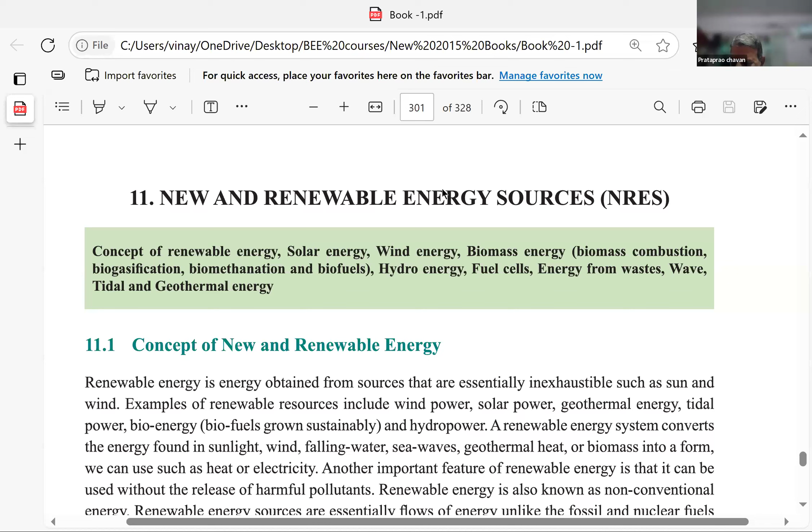Okay, I think we should begin because this particular chapter is the longest one. It contains 28 pages. The purpose of this chapter, New and Renewable Energy Sources, is to clear your concepts about the energy sources, their technology in brief, and with respect to their efficiency levels or the reasons why the efficiencies are less or more, what are the constraints. That's a general type of chapter.

On this chapter, you will hardly find any big question, not 10 or 20 mark questions. If you go to the previous exam papers, test papers or solved papers, you will find about 3 to 4 marks multiple choice questions based on this chapter. So you have to be very particular when you read this. You don't expect big examples or problems to be solved, not even for 5 marks, but there will be short notes related to a particular energy source and its efficiency. The short notes will be having approximately 5 marks. In addition, in the first section of MCQ, out of 50 MCQs, you may find 3 to 4 MCQs based on the materials in this chapter number 11.

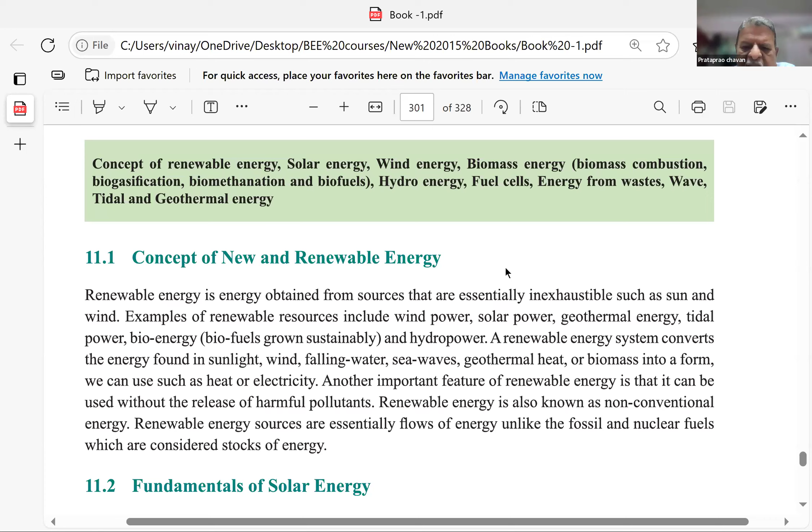So let us start. Since it is basically a conceptual clearance chapter, we will discuss the concepts. Whatever is readable, you can read through and understand; I will not spend much time on that. I will be more interested in explaining the things which are not very clear when you read these pages, right?

So, fundamentals of solar energy. What is solar energy? You all more or less know. The purpose of exploiting this particular energy source is basically to avoid carbon use or hydrocarbon burning while generating heat. The heat energy we get from the solar rays is environment friendly, meaning it doesn't pollute the environment any further.

But solar energy has got one drawback: it is very widespread. The quantity of solar light or energy falling on the Earth's surface is spread over a very large area, and this spread-over energy intensity is so low that as it is, it cannot be used. You will have to collect it, concentrate it somewhere, and then raise the temperature of the medium you want to heat.

Again, solar spectrum is of different wavelengths of light - ultraviolet, higher wavelengths, lower wavelengths - carrying different types of heat components. So when you are designing a solar cell, you are not able to collect all this solar energy in different wavelengths into that solar cell. Therefore, the efficiency of a solar cell converting sunlight into another form of energy, whether heat energy, light energy, or photovoltaic energy, is limited. Remember, solar cell efficiencies range from 10 to 15% or 15 to 18%. Even in the most highly efficient cell, it will not exceed 20%.

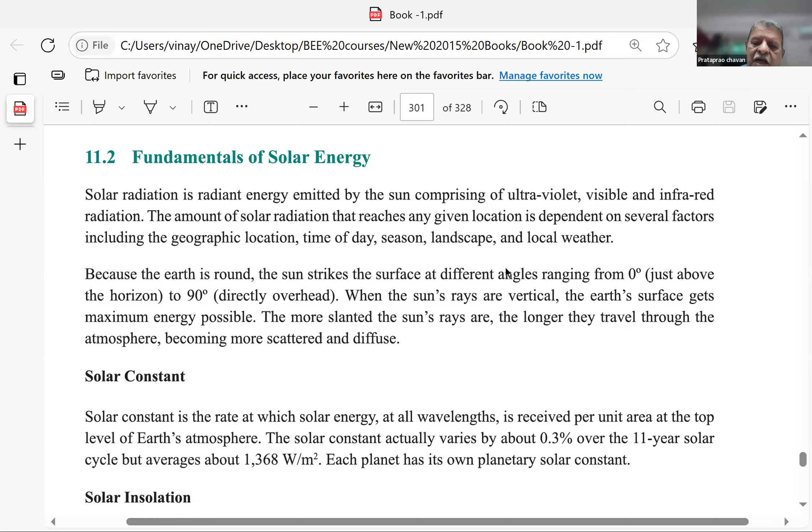One is solar constant. What is solar constant? When the sun is in the sky, it gives light not only to Earth but to all the planets in the solar system. We've learned there are 9 or 10 planets, whatever, it's immaterial. So the solar light reaching each planet, including Earth, varies in intensity depending on the distance of that planet from the sun.

Our planet receives a certain intensity of solar light, about 1368 watts per square meter. This is constant for the entire earth wherever sunlight falls, but where does it fall? At the outer limit of our atmosphere. That means where the atmosphere exists above the earth, at that end it is 1368.

But when it actually reaches the ground, it has to pass through cloud cover and the gaseous surroundings in the atmosphere, stratosphere, at different kilometer heights. These covers surround the earth, so the sun's light penetrates through these gaseous and air covers onto the surface of the planet.

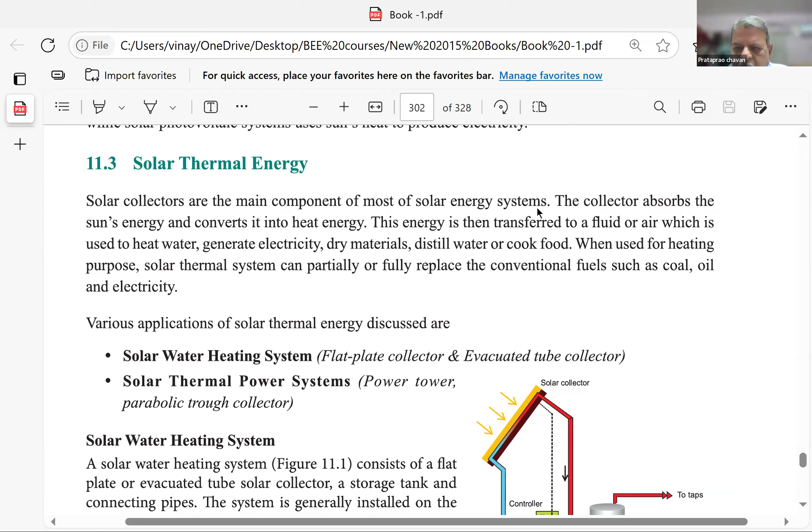It goes through the center tube, comes back all around the same tube. Now in this travel from this end to the outlet end, this middle tube is covered with a heat absorbing metal, or a layer, heat absorbing paint or some synthetic layer. This layer absorbs whatever sunlight is coming, and the outer tube is a vacuum tube.

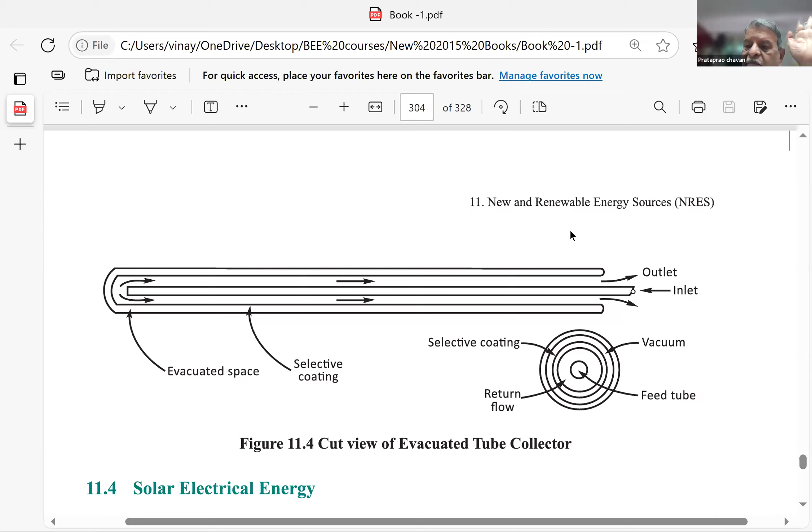It transfers by radiation. So the outside ray, sun's heat, will go to the inner tube. Because of the absorbent layer, it gets absorbed and imparts the heat to the inner water, but it cannot come back. Whatever radiation small amount comes back, the loss will be very minimum. So the efficiency of this type of evacuated tube heat collector is much more. You can reach outlet temperatures of 150 degrees centigrade, more than twice what the flat plate collector gives.

No, this is a flat plate collector, this one. So the efficiency of this is less. It can raise the temperature 50 to 60 degrees, whereas this type of tube arrangement gives you 150 degrees.

Now, this difference of 50 degrees, 60 degrees or 150 will be prominent when you go to industry. In an industry where hot bath of water is required for many reasons, sometimes it is quenching, sometimes it is annealing function. They have to dip their hot parts into the cold water at a certain temperature, and they have to maintain the temperature of that hot bath water to certain degrees. They are using gas burners or other type of heat and spending money on that, creating CO2.

As an energy auditor, I will suggest you put this type of heat collectors on the roof of the factory and reach a water level of 150 degrees centigrade temperature. Their bath temperature requirement is hardly 120, so 150 is a good temperature for them. They can totally eliminate the use of gas burners or other diesel fire systems and all that. They can remove that system and go for a changeover.

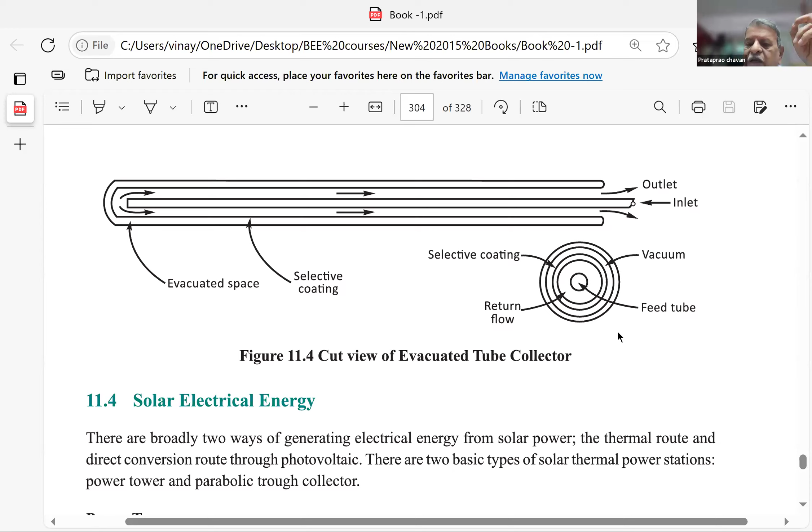From this point of view, an energy auditor should know which are the clean systems that can serve the purpose of the industry, different thing.

Now, another way of collecting solar heat on a much more concentrated level. That means reaching temperatures of say 500, 600 degrees centigrade, which is not possible by evacuated tubes or flat tubes. Remember in childhood you used to burn a paper by putting a glass and collecting the solar light into a point. The point is falling on the paper and the paper starts burning. That is nothing but concentrating the solar radiation heat at one particular point to increase the temperatures.

Same thing is used here when a solar power plant is based on heat, it is called solar thermal power plant. Thermal heat, anything related with heat is thermal. Okay, so here is the sun god here.

The sun rays are falling on mirrors, reflectors they are called. The reflector is of concave shape and its center is somewhere at a distance. This can be adjusted always, we learned that in physics experiments. So this concentrating instrument has a center at the top of a tower, and this tower is coated with absorbent materials here.

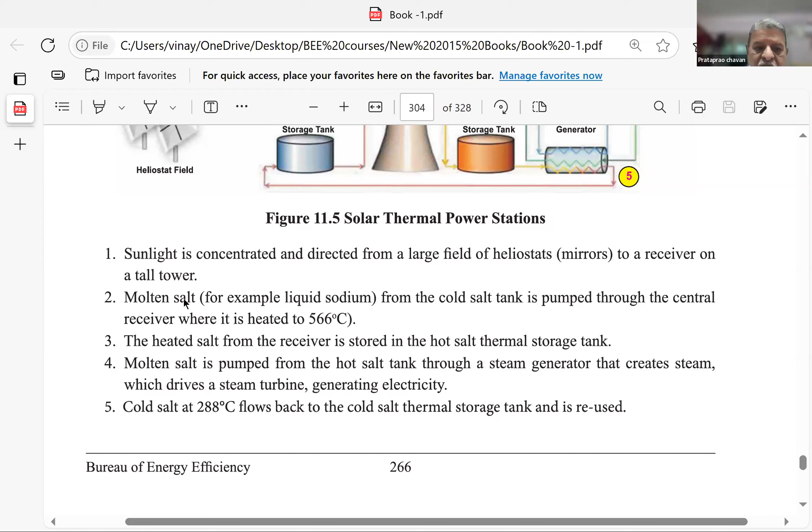Okay, all the details are given here. See, sunlight is concentrated, directed from a large field of heliostats, that is mirrors, to a receiver on a tall tower. Molten salt, heated salt, molten salt, and this thing - conceptually it is better. Molten salt is a mixture of 60% sodium nitrate and 40% potassium nitrate.

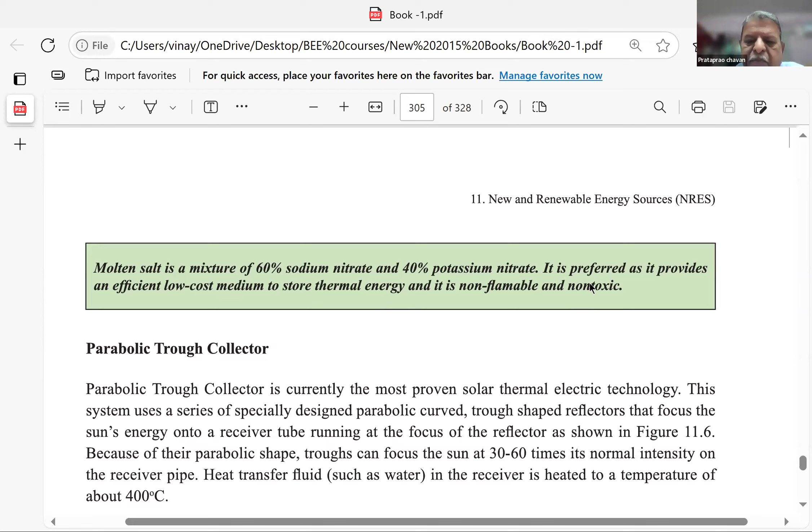It is not the sodium chloride which we eat as salt, that has a different composition. It is preferred as it provides an efficient low cost medium to store thermal energy, and it is non-flammable and non-toxic. It's a safe medium, that is why it is used. So many times in MCQs they may ask why salt is used as a medium.

Then there is another method of concentrating the solar heat. What is that? It is much simpler than the salt, it doesn't involve any salt. What they do, you see the reflectors here - it's a parabolic reflector. Means what?

Suppose, I will just clear your concept. If you have a plastic water pipe, 4-inch size, 8-inch size, or a very large plastic pipe having a size of say 4 feet diameter, 5 feet diameter, if you cut it exactly in half, you will find two troughs, two halves generated. If it is a long pipe, a parabolic structure is generated.

Now this parabolic structure has somewhere a center point, Kendra Bindu. Now that center point is receiving all the reflected sunlight concentrated into that point. So if the trough is parabolic and running lengthwise, the same center will also be running. That means everywhere in this red line, there will be intense heat concentrated from these parabolic surfaces.

Now, if I put a water pipeline exactly in the center, the water in the pipeline will continuously receive the highest heat temperatures from these parabolic reflectors, as it was given to the water tank on the tower. So instead of raising a tower, what I will do is lay a length of kilometers of these parabolic structures in straight lines all over the field, 10 acres, 15 acres of land, and run this pipeline through the center, collect all such concentrated water, which is very hot. And the magic is, at this end, the water will enter these tubes as water which is at ambient temperature.

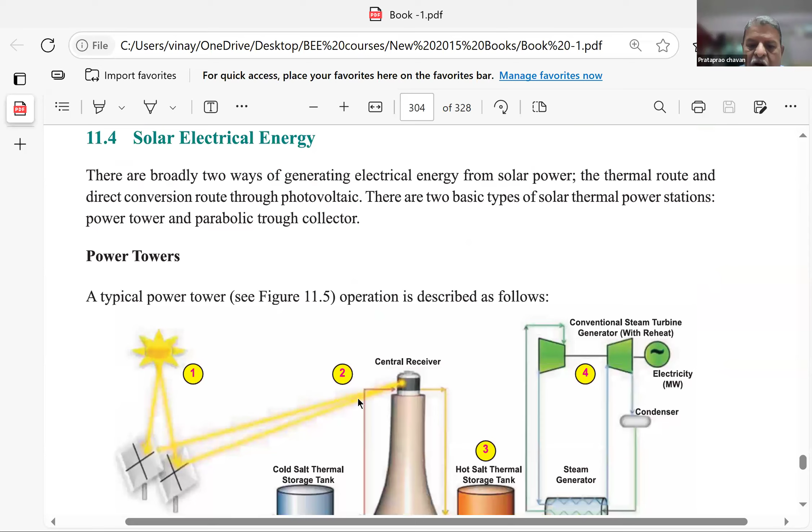So when you want to generate power, you need a higher scale on which you have to collect the solar heat. The higher scale collection is easier with this trough technology, parabolic trough collectors. Wherever there are solar thermal plants, they prefer this method rather than using salt and creating a tower with so many mirrors operating on that. There are some pilot plants already operating on that system also, but this is a popular system and many thermal plants use this.

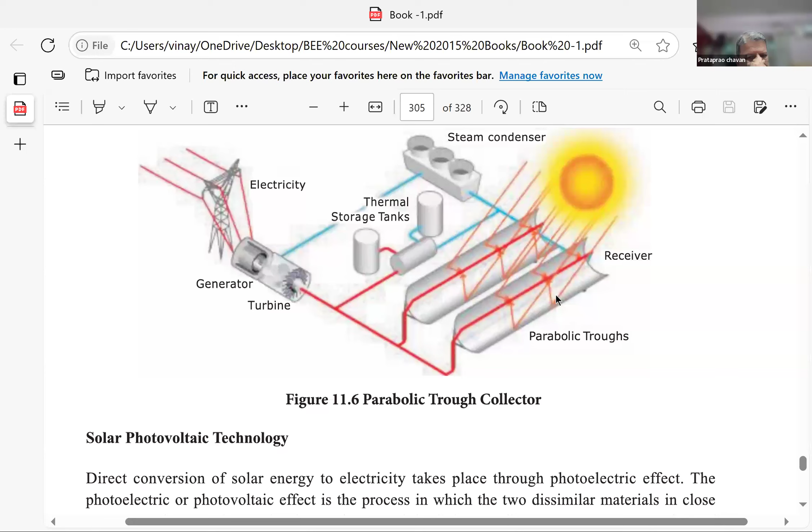Then comes the light component in solar. One type of energy we have already discussed. The second type of energy needs no water, no steam, no medium in between. You design a silicon material cell in such a way that the solar incidence, or solar heat, or light falling on it, due to the spectrum length of that particular light, causes the solar silicon material in the cell to get disintegrated into positive and negative electrons.

And we know that if there is a positive and negative electron, it will develop an electronic circuit between plus and minus. That means you have a potential difference between two points. This potential difference, if you put it through a resistance, you will get light or you will get power.

If you put a number of such cells together, for example, one cell gives you only 0.5 watt. If there are 100, you will get 50 W, or so, that you can work out with units. So if you put a number of cells into a rectangular panel, it is called a solar panel. The individual part in that solar panel is a solar cell. So a number of solar cells connected in series will increase the voltage, and the more solar panels you use, the more land covered by it, giving you power in megawatts.

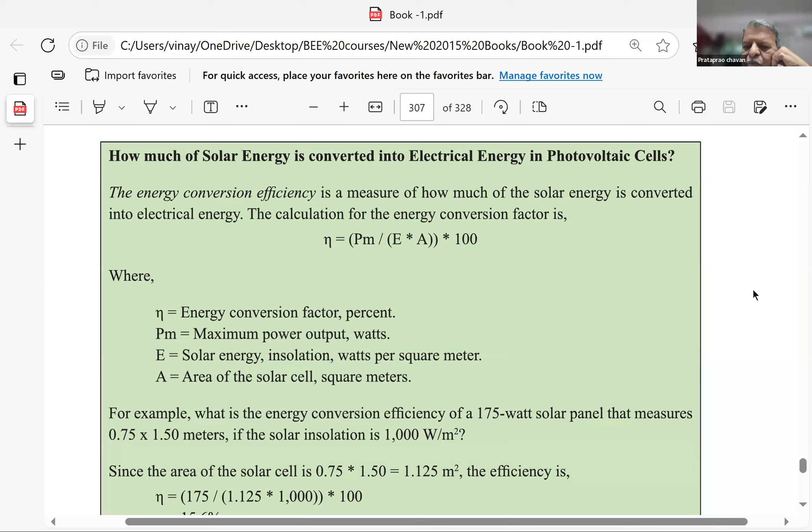Now, he has given you a calculation of how much solar energy is converted into electrical energy in a photovoltaic cell. Go through the example, it's very simple. The answer is interesting: efficiency for this cell is 15.6%, much below 20%. 20% is for new advanced technology cells, but otherwise conventional cells are 10 to 15%.

Now, building integrated structures - these are all innovations. What is building integrated? If the solar cells or solar panels are designed with a very hard glass surface, you can create a roof out of the panels only. There's no need for a separate roof, so the cost of the roof of the building can be saved. The roof itself becomes the power generating solar cell roof. That is building integrated structures.

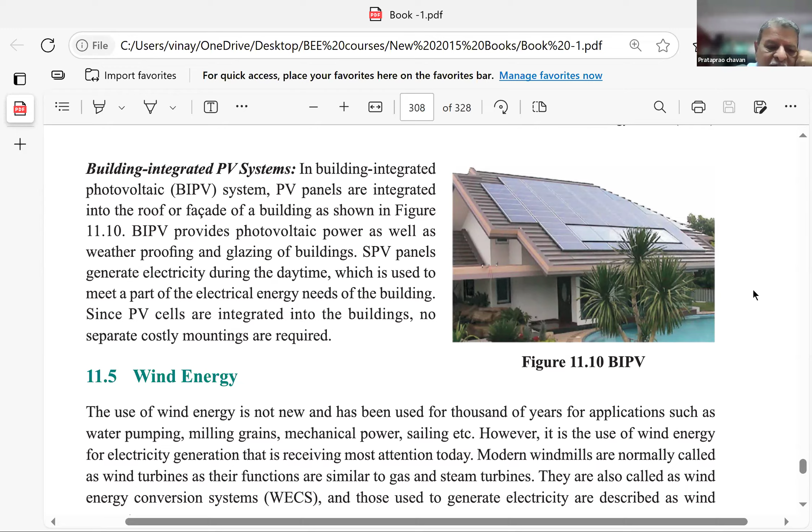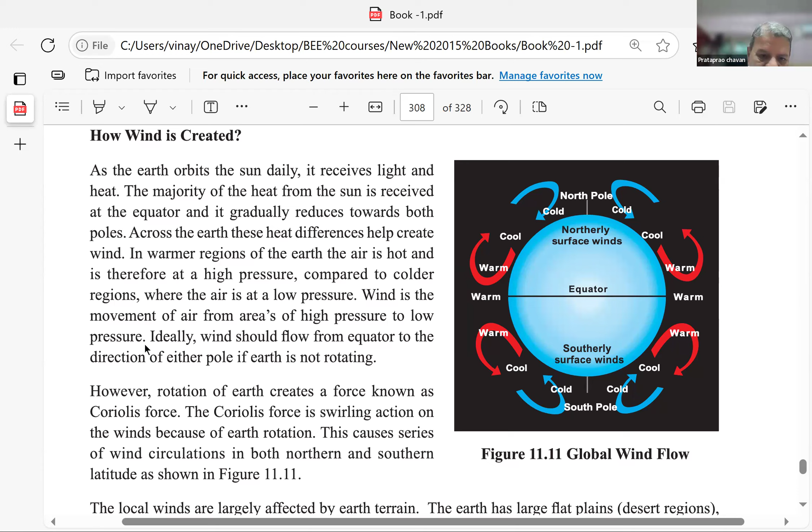And then we say northern winds, southern winds. When we say the rain comes from the south, isn't it - the cloud is carried by the wind. So this is how wind is created. This is the description I have told you. You can read through: the earth's rotation creates wind.

This is known by different scientific names. Rotation of the earth creates a force known as the Coriolis force. This Coriolis force causes a swirling action on the winds because of earth's rotation. This causes a series of wind circulations in both northern and southern latitudes as shown here. So if there's an MCQ asking how wind is generated - because of the earth's rotation, right?

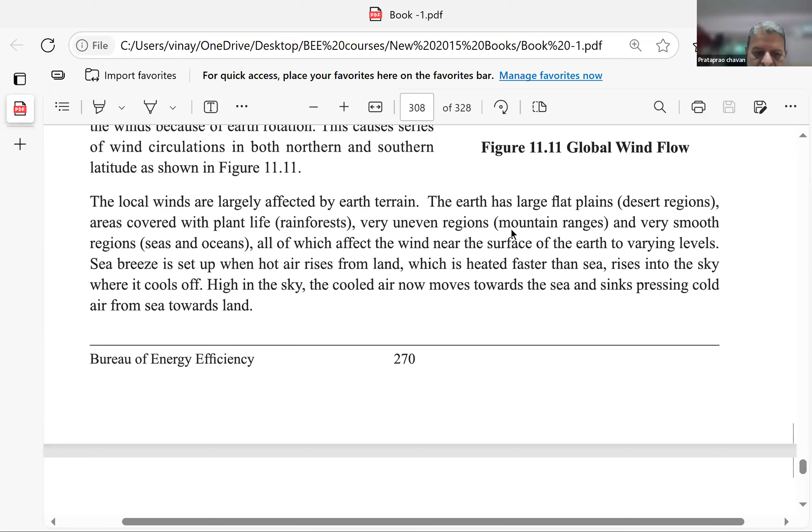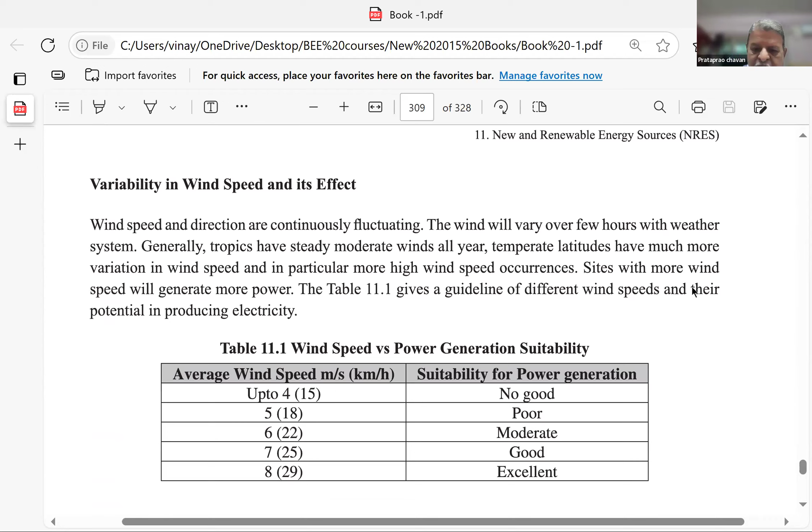Okay, now let us see the further effects of that - variability in wind speed and its effect. Wind speed is not uniform at all locations. Even at the same location it is varying - sometimes high velocity, sometimes poor velocity. There are numerous atmospheric factors for that. If we take an air velocity survey at different locations, you will find that air speeds are different.

But what we have selected is wind speed versus power generation suitability. Even a small wind velocity will rotate a small turbine, but it's not commercially collectible, so we leave that - we cut it off, like we say for solar. Is there no sunlight in the morning? Yes there is, but it's so low intensity it won't generate power. So we select a solar window, say morning 9 to afternoon 3. Likewise, for different wind speeds we have selected a window like this.

4 meters per second converted into kilometer range is about 15 kilometers per hour. If this is the velocity, it's no good for power generation - we will not collect this. As you increase the wind velocity, naturally you start generating power. At 18 it may be the cut-in speed, poor. At 22, moderate velocity. At 25, good velocity. And at 29, excellent velocity at which your windmill will run faster and generate more power. How does it generate?

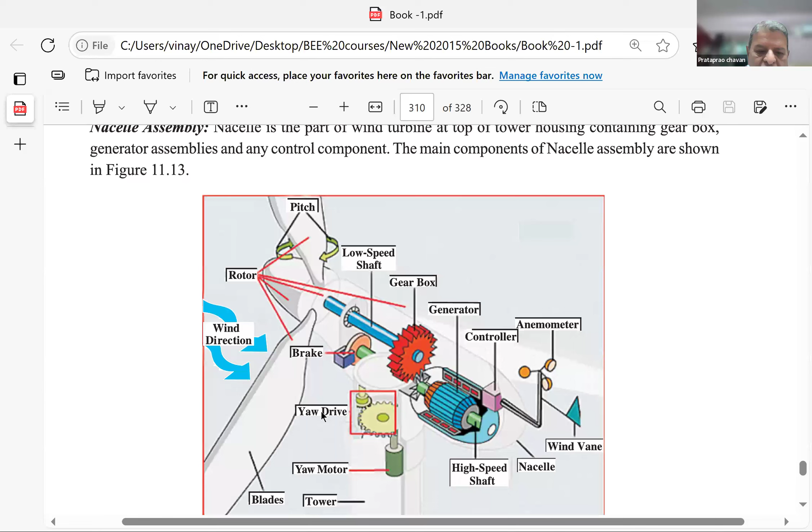This change in direction of the blade is achieved by the yaw motor, an electric motor. This electric motor gets sensing from this wind vane, which senses in which direction the wind is blowing, and accordingly gives signal to the motor. The motor, with the help of this gearbox, will slowly rotate the turbine and make it right angle to the wind.

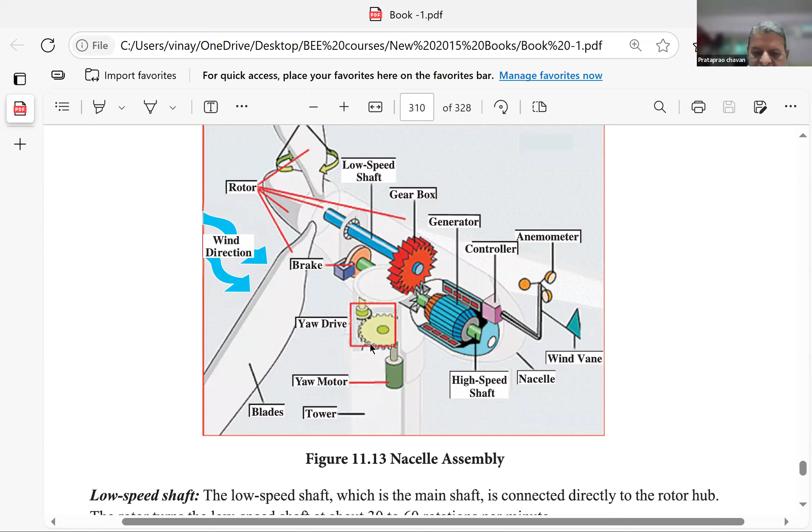Okay, these are some basic things we should understand. So as explained, it's low speed shaft, high speed shaft, gearbox and generator. Disc brake - why disc brake?

You can imagine a condition when there is a typhoon or a very high velocity of wind, a storm has come. Then what will happen? The wind speeds will go beyond control, natural wind, and the turbine will start rotating at tremendous speeds. It will damage the entire gearbox, generator, everything. To avoid that, there is one safety mechanism.

These blades can also rotate here at the base. Right now, to collect maximum thrust, they are at right angle to the wind. If the thrust is more, they become parallel to the wind, so they cannot get any thrust from the wind, and it will stop rotating.

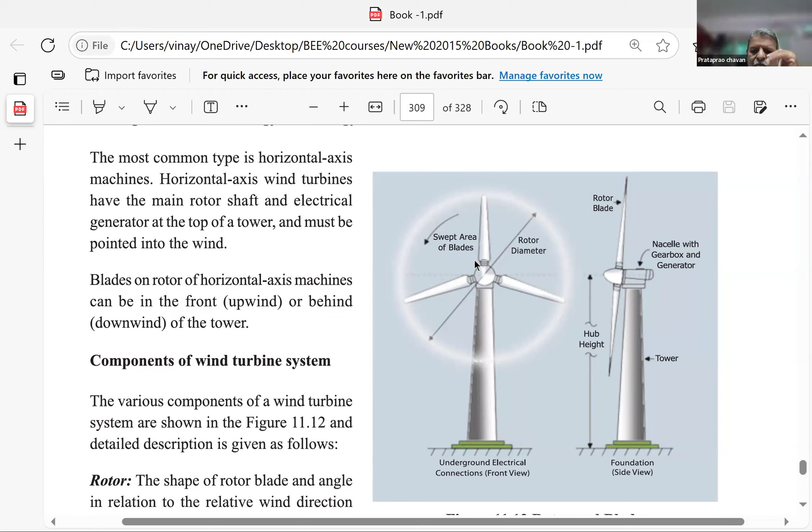When it is in this position, it will receive the thrust. If it turns parallel to the wind force, it will stop rotating. This rotation is finally stopped with the brake motor. These are just safety mechanisms built into that.

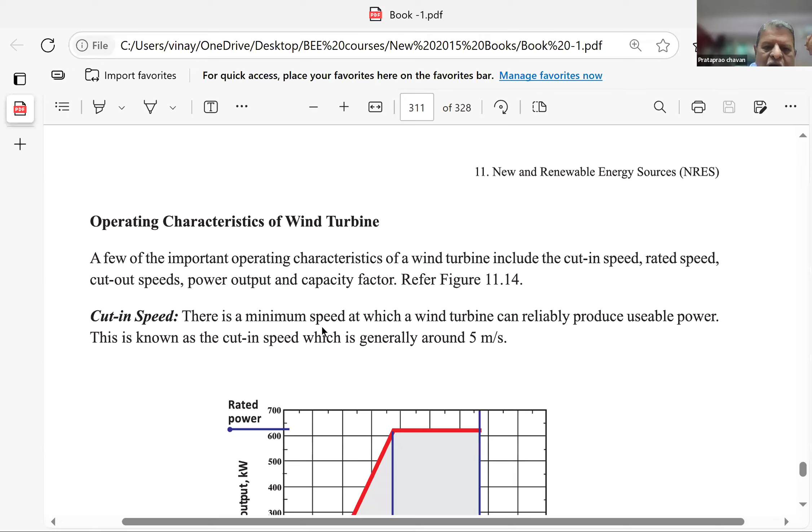So I'm sure you are now aware - disc brakes, yaw control means the rotational control - and operating characteristics of the turbine. You remember only these three terminologies.

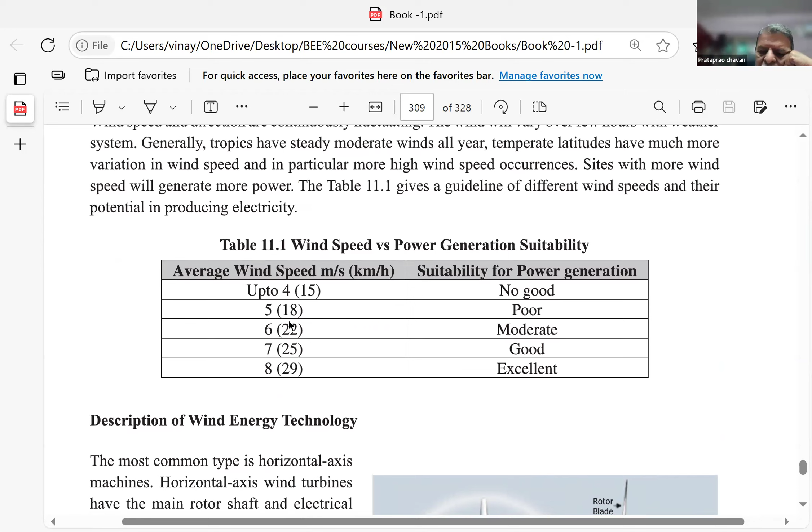Cut-in speed: this is the minimum speed at which a wind turbine can reliably produce usable power. This is known as cut-in speed, generally around 5 meters per second wind speed. As we have seen in the earlier table, wind speeds at which the generation starts. This 5 is poor, but it is sufficient to overcome the inertia of the rotor and start the windmill. This speed is called the cut-in speed.

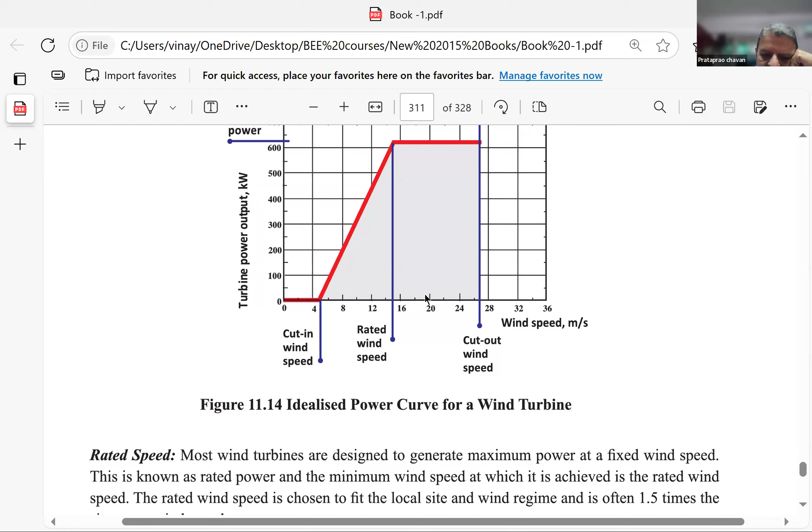Any wind speed going beyond the peak power, the blades will stop rotating. They will become parallel to the wind force, and power output is zero - it will not generate any power beyond this. So this is the graph area in which the wind is generating power - this is the characteristic. The rated speed is at which rated power is achieved at the rated wind speed. Most wind turbines are designed to generate maximum power at a fixed wind speed.

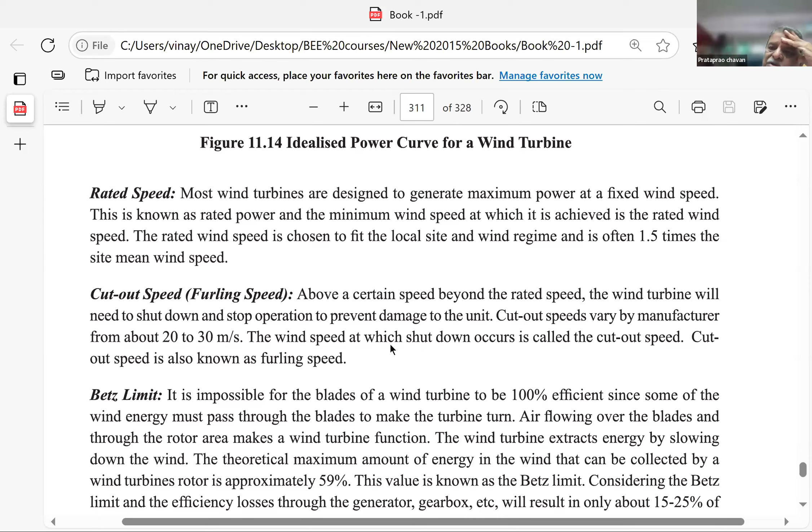Any speed beyond that, it will stop generating. The cutout speed is called furling speed, the speed at which the horizontal blade will go right angle and stop generating. This is called cutout. In general terms we say cut-in and cut-out. Cut-in speed is the minimum speed at which the machine starts rotating. Rated speed is when it is generating full power, and cutout means the speed beyond the limits provided, so it stops generating power.

Now let us look at Betz's limit. It is impossible for the blades of a wind turbine to be 100% efficient, since some of the wind energy must pass through the blades to make the turbine turn. Air flowing over the blades and through the rotor area makes a wind turbine function.

The wind turbine extracts energy by slowing down the wind. When the wind velocity strikes the blade, it rotates the blade, but it reduces the wind velocity for that particular location.

The theoretical maximum amount of energy in the wind that can be collected by a wind turbine is approximately 59%. This value is known as Betz's limit. Remember, Betz's limit is the maximum theoretical amount of energy in the wind that can be collected by wind turbines.

Considering the Betz's limit and efficiency losses through the generator and gear, this will result in only about 15 to 25% of the wind energy being converted into useful power. We have seen solar heat power or solar light power converted into electricity has an efficiency below 20%, in the range of 10 to 15%.

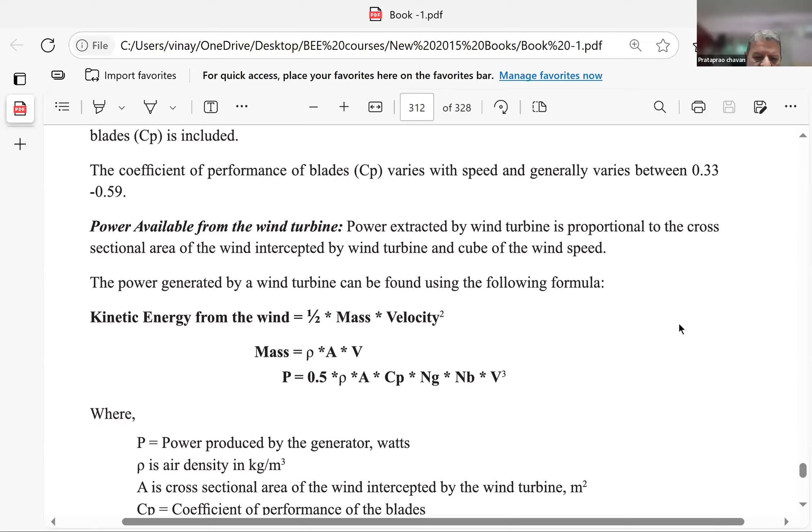Now there are different definitions. You can go through all these definitions: what is rotor efficiency, what is the coefficient of performance, power availability from the wind turbine, kinetic energy from wind, mass of the wind, and the power output.

Normally they don't ask a question or numerical on this formula, but it is better to know conceptually how it is arrived at. The speciality of this formula you will find. I will only explain the formula. Power generated in watts is a multiplication of 0.5, which is a coefficient.

This rho is the density of air. A is the cross sectional area of the wind intercepted by the wind turbine in square meters. You can calculate the area of a circle when you know the radius or diameter. So the area of the blade rotation circle is in meters square.

Coefficient of performance of the blade is given by the manufacturer. Generator efficiency is also given. Gearbox efficiency is also given. What is the relation between them, where V is the wind speed in meters per second?

If you look at the formula, you will find this is constant. Wind velocity, I mean density, is constant. Area we are varying by increasing the blade length. Both these efficiencies are constant. And then what is V? That is the wind speed.

So power is proportionate to the cube of the velocity of the wind. Suppose the velocity of the wind doubles - it was earlier 5 meters per second, it went to 10 meters per second. How much will the power be affected? 3 cube times... that means 2 cube is 8. So if the earlier velocity is doubled, the power will be 8 times more.

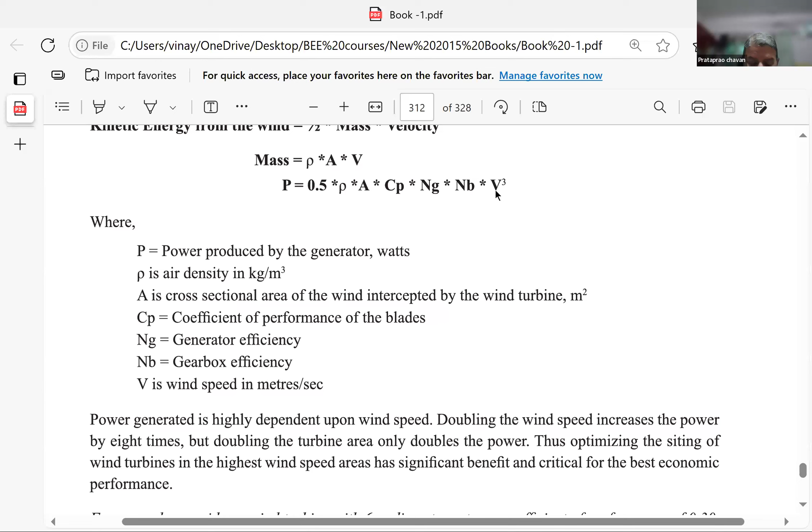Remember this always: it is in cube form. Increase in velocity, increase in power is in cube form. If it is 1, it will remain so, but if it is 2, it goes to 8 times, that kind of thing. This will be an MCQ again for this small concept, so let's not be confused about it.

For example, consider a wind turbine with a 6-meter diameter rotor, coefficient of performance given, generator efficiency given, wind speed also given - they ask you to calculate the power. Just use this formula and do it. If at all, in a very rare chance, this numerical problem comes, it will be for 5 marks maximum.

Your answer will be judged not on the final answer you arrive at, but whether you have used the correct formula, whether you have filled in the values at the correct place. You may make a mistake in calculation, that is okay. But otherwise, this procedural correctness will give you 4 marks out of 5. So be sure that the formulas you are using are correct.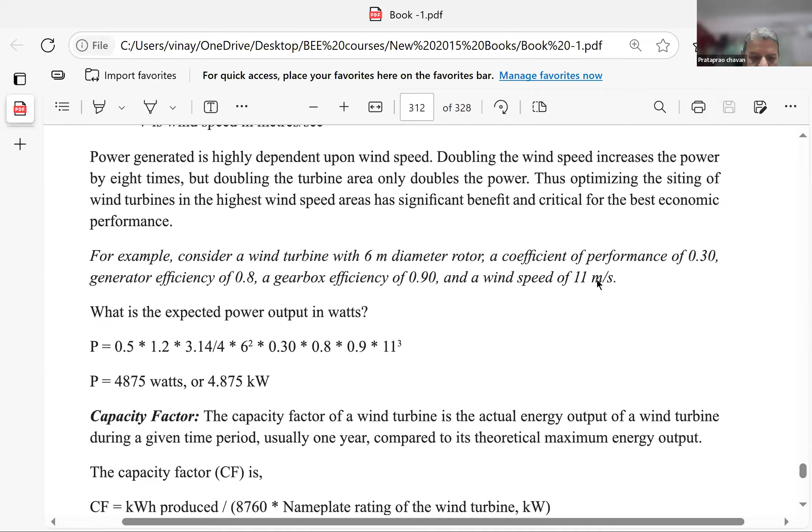Now let us come to capacity factor. This is another very particular factor, and we should understand its concept. What is capacity factor? It is kWh produced upon 8760 multiplied by the nameplate rating of the turbine in kW.

I will give you a simple example. I have an industry with the capacity of producing plastic buckets, 1000 buckets per week. I purchased the machinery, and I was guaranteed that 1000 plastic buckets per week would be manufactured. But when I take a review, I find that on average, instead of 1000, I manufactured only 920 buckets. So what percent of capacity have I used for that plant? It's 920 upon 1000, that's the percentage at which I have used the capacity.

Similarly, a windmill is guaranteed to give you so much generation, so many kWh in a specific period, per day, per hour, per second, whatever. The time limit is the same because it's a ratio. So in whatever time period you assume, the kWh produced is divided by the actual number of kWh you should have produced as per capacity.

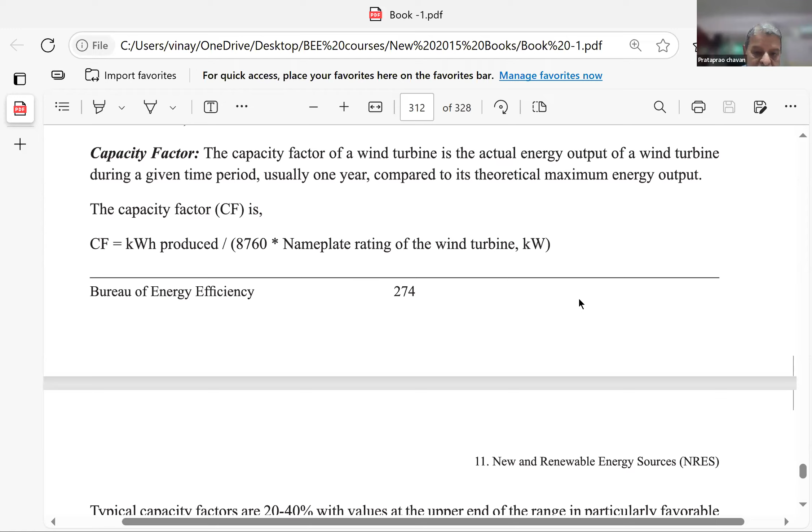That means if you have a power plant based on coal, supposed to generate 210 megawatts per unit, this 210 will give you consistent performance for the whole year, up to full capacity. So if I want constant power at a fixed rating, I will prefer a technology which gives me a stable load rather than depending on wind or solar, such unreliable energy. That is one factor why renewable power is not so very popular commercially.

Okay, this you can read through, nothing long. Then the next form of energy is biomass energy.

What is biomass? Simply speaking, anything that is growing naturally is biomass, right? Any green mass, any tree, any type of flora into that particular location. Now, biomass is made up of hydrocarbons and carbons.

Every biomass can be burned. If you burn it, it releases heat energy. What we want is energy. Heat energy from solar we are extracting. The thrust energy from the wind we are extracting. The hydropower energy of gravity, water falling from height, we are collecting. Similarly, heat in any form can be converted into electricity.

Now, if we get heat from biomass, it can also be converted into energy. What you need is a technology to suitably burn the biofuel, release the heat, and use boilers which can use biomass as a fuel. Likewise, you have boilers suitable for municipal waste. You must have studied FBC boilers in your boiler chapter. So these type of boilers can use this.

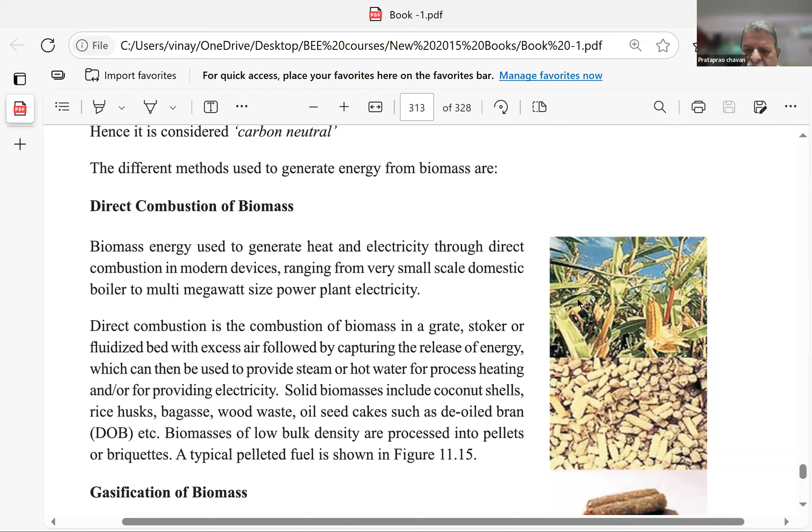Now, how to use this biomass? Solid biomass includes coconut shells, rice husks, bagasse, wood waste, oil seed cakes, de-oiled bran. Biomass of low bulk densities are processed into pellets. If it is wood shavings, it can be compressed and converted into pellets, small capsules you can say, wood capsules, and they can be burned in place of coal in a boiler.

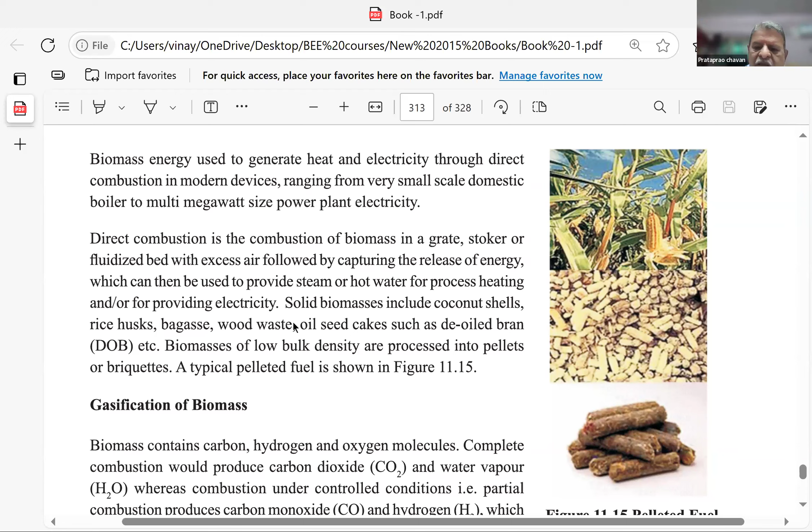Second, use of collecting the energy is gasification of biomass.

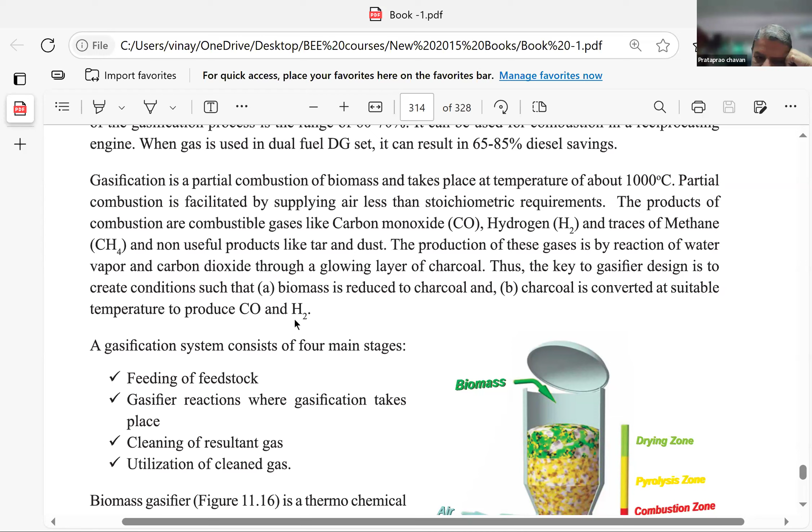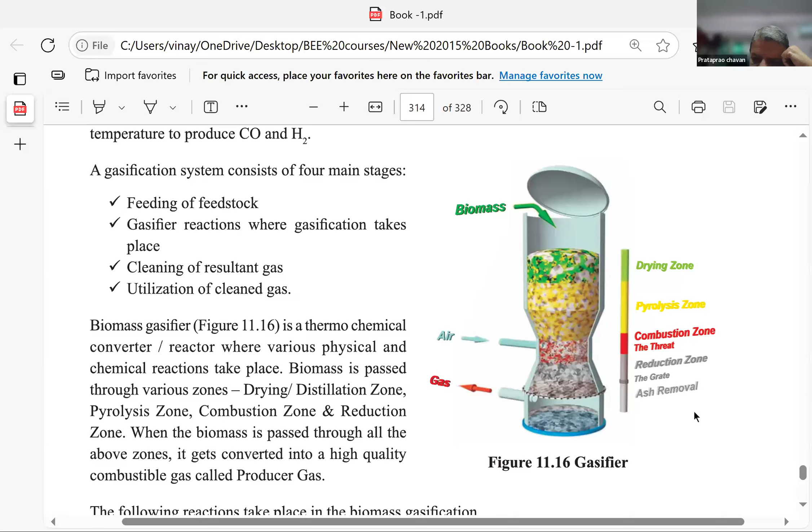So you remember the figure, try to see the segments: drying zone, pyrolysis zone, combustion zone, reduction zone, ash removal. This is a gasifier unit. It's simple, like any other equipment description. You try to just understand conceptually what is the purpose, and what are the exothermic and reduction reactions.

What is exothermic? That which gives out heat. Therm, as I said, means heat. So exothermic means the reaction that gives out heat. That means C plus O2, when carbon burns and becomes carbon dioxide - two elements of oxygen, one carbon, for carbon dioxide. In doing so, this is a burning process in which oxidation takes place. It releases heat, so it is exothermic.

Similarly, when hydrogen burns, it reacts with oxygen and forms water, but in this process it releases tremendous heat - it's a high intensity exothermic process. When there are reactions where heat is absorbed, meaning you have to heat it to complete the reaction, it's called endothermic. Remember: exothermic gives out heat, endothermic absorbs heat. This is also called the reduction, carbon and H2 reduction process.

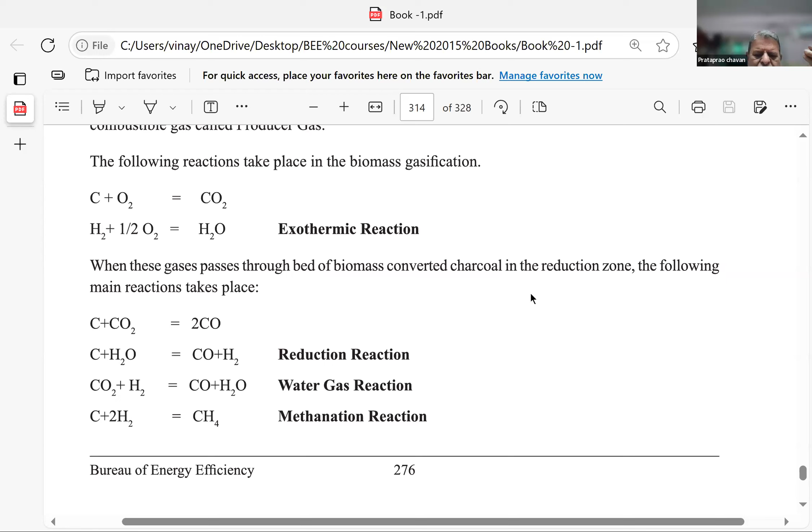Now this is water gas, this is methane gas. Methane is CH4. Remember the formulas, because there are a few formulas you will have to keep reminding yourself of.

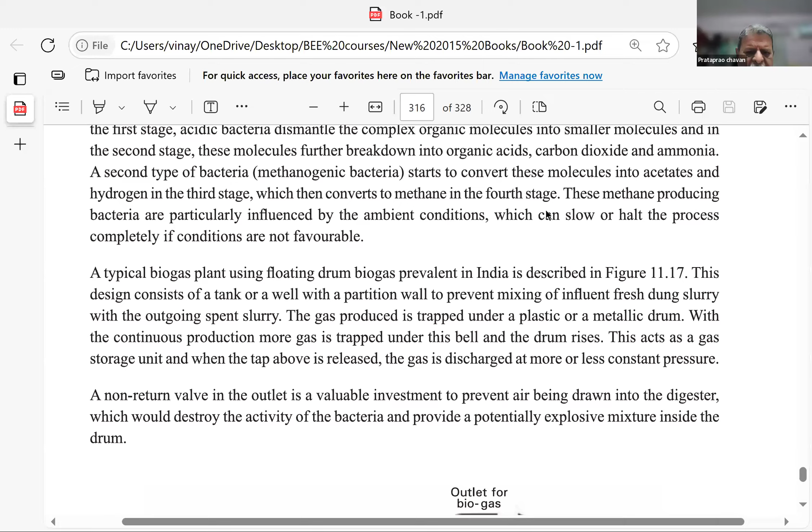Then there's biomethanation of biogas, an anaerobic process. Don't go into the chemical formulas, you may find them complicated, but read through and know the concept of how biogas is generated. You must have come across biogas units in rural India, put in many villages. Bio is the slurry of cattle dung, water, and other bioenergy material, mixed into a homogeneous mixture and then fed in here.

When it goes through the fermentation process, a gas is evolved. This gas passes through two filters, and being lighter than other elements, it goes up by gravity and gets collected - the gas collection is in the tank and the slurry goes here. This collected gas, which rises due to low density, is then collected and used for different purposes through a pipeline. Remember, the biogas generated here is not under pressure - it moves because it's in gaseous form. It separates from the solid slurry, goes up, gets collected at the top, and then is used.

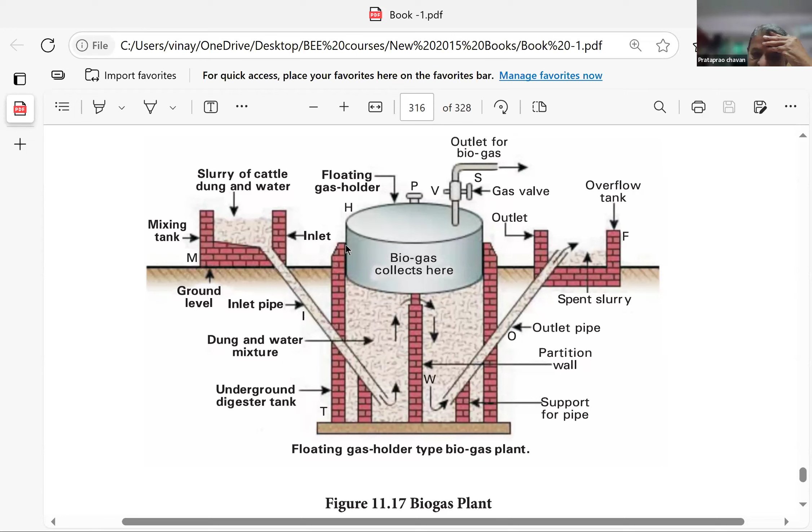Now this biogas has got multiple functions. It can be used as a fuel. It can be used in a chemical factory to disintegrate and separate out the hydrocarbons from it.

Ethanol is created, produced from the fermentation of molasses, a byproduct in sugar manufacturing. Or it can be manufactured from any carbohydrate - starch, sugar, or cellulose. For example, sugar beet, sweet corn, lignocellulosic materials like straw, wood paste, wood waste - all these biomaterials can be converted into biogas or ethanol.

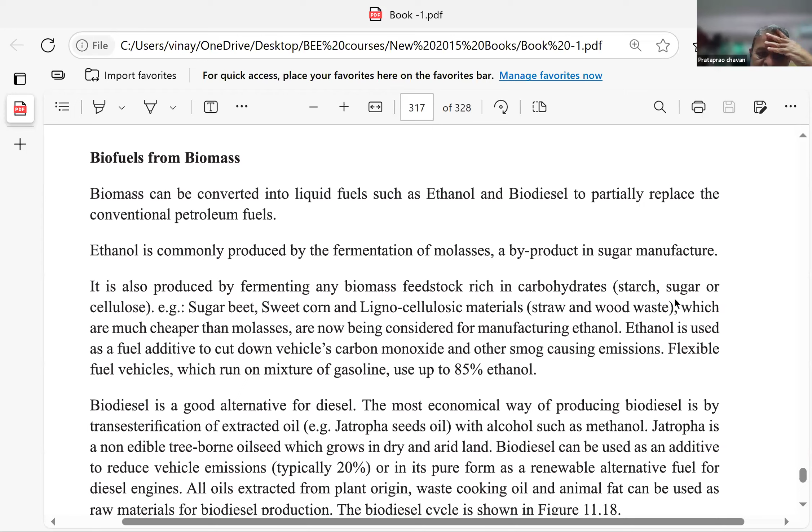You must have heard that flexible fuel vehicles run on a mixture of gasoline using up to 85% ethanol. The same characteristic of petrol, or gasoline which is another form of petrol, can be substituted with 85% ethanol. Right now, the government is allowing the mixing of ethanol into petrol as high as 20%, not more than that.

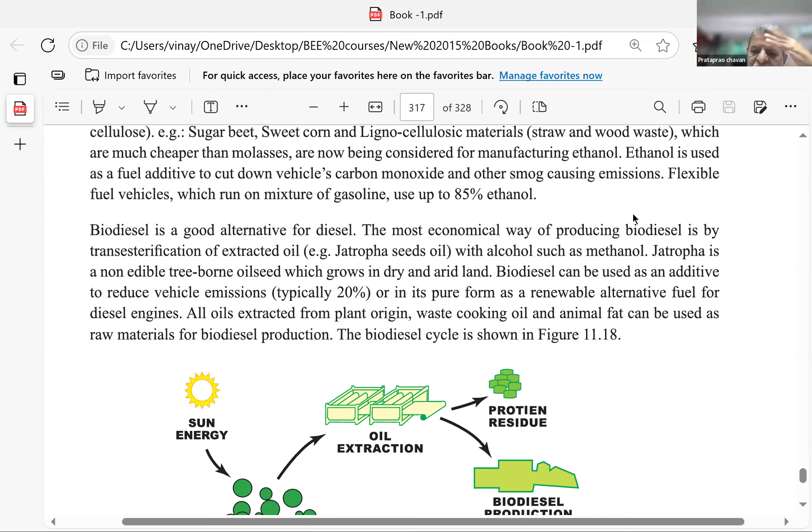They started experimenting with 5%, 10%, 15% blending. Now 20% is permitted, but people are not using it. Right now it is 15% that you can use, thereby reducing the demand for petrol.

Biodiesel is a good alternative for diesel. The most economical way of producing biodiesel is by transesterification of extracted oil, jatropha seed oil. Jatropha is a plant. The seeds of this plant can be extracted and converted into diesel by a particular process called transesterification. It can be used as an additive to reduce vehicle emissions.

Typically, 20% reduction is possible if you mix the biodiesel. What is this process here? Sun's energy goes to jatropha seeds, and the seed oil is extracted. This oil goes as a protein residue, and the oil in liquid form goes into making biodiesel.

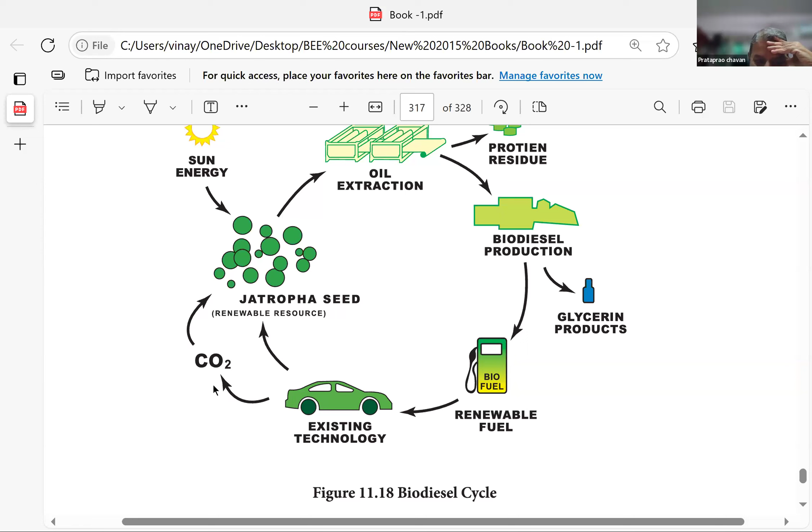This biodiesel is used for multiple purposes, such as glycerin production, cosmetics, and other industries. It also goes to diesel pumps used for fueling diesel vehicles. But the exhaust of biodiesel is also CO2 - you cannot eliminate carbon by using biodiesel. The only benefit is reducing the cost of imported petroleum which we have to pay.

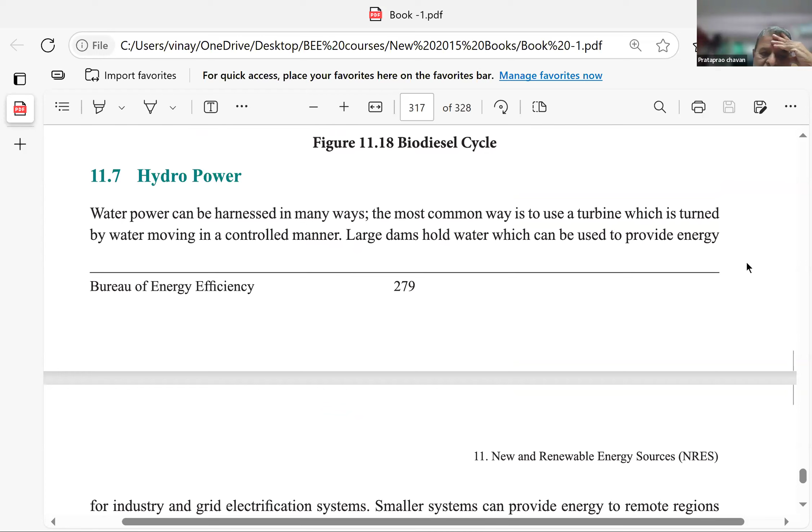Another source we'll look at is hydropower. Hydropower is the simplest way of generating power using the gravity of the earth. Take a simple case: you put water at an elevated position, a small turbine at the bottom, keep distance in between, and release the water through a pipe to the rotating turbine. It will continue to rotate so long as water is flowing from the pipe and impinging on the turbine blades. As simple as that.

But what is the reliability? It works so long as there is water in the upper reservoir from which it comes to the turbine. If the water dries up, generation stops. Therefore, when the rain god is happy with us, we can have ample hydropower. If it's a drought condition and there are no rains, then all the big dams go dry. You cannot generate power because whatever water is there in the dam has to be used for drinking and irrigation purposes - you can't use that water for power generation.

Depending on the size of the water reservoir, we can generate a corresponding size of power. For more than 25 megawatts, it's called large hydro - hydro can be 700 megawatt, 1000 megawatt. Our own Koyna is about 2000 megawatt. But here we are talking about renewable energy as small hydro units, which starts from 25 megawatts and below, so 25 and above is large. Small hydro is up to 25 megawatt feeding the grid.

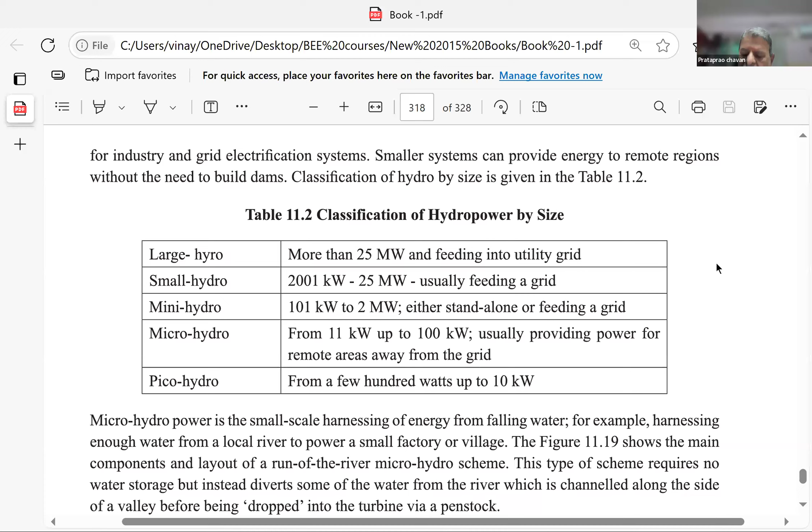Suppose there is a cluster of 10 villages in rural India, with a small river flowing in their area or fields. They can have a small turbine - just put up an 11 kW turbine. That is sufficient to give lighting power, not for machinery, to all the villages. They can feed it in. So depending on the requirement, an energy manager or energy auditor should give advice: yes, you can have a small plant here, put your own grid, and you will have almost free power, because the capital cost is given by the government under different subsidies.

So there are methodologies, look at this. The river is originating, meaning coming from the mountains, and flowing as per the contour of the land. This contour goes down, down, down. This is the main flow.

Many times people are agitating for stopping the river. If you propose a very large dam to stop the water, nobody will allow it. So we have a win-win situation: a small barrage, not a dam. This barrage creates some small height in the water and diverts part of the river's water through these channels.

That water ultimately comes back to the river. So you can say, I'm not disturbing your river, I'm not taking out any water, water will go through the river only. But I will not stop the entire water. Part of the water will come, creating an artificial reservoir here.

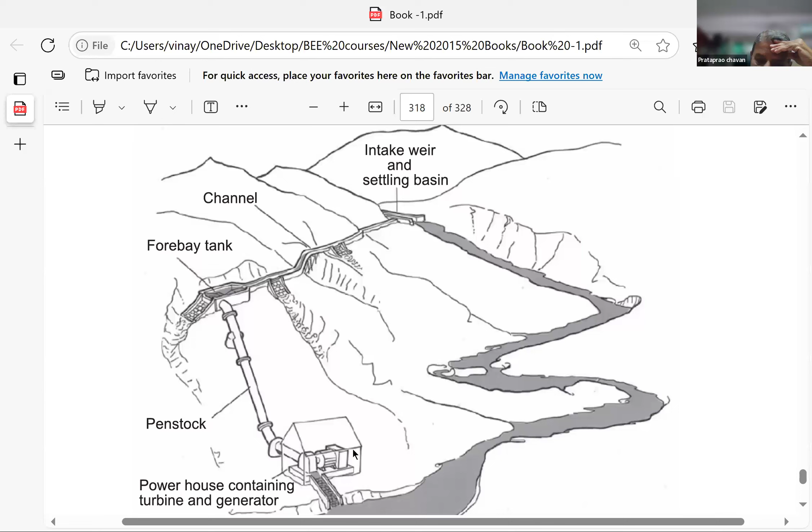From that height, right up to the river bed, you lay a pipeline. This pipeline, called a penstock, will carry water and rotate this small turbine here. This turbine is connected to the generator, which generates power. The outlet of the water from the turbine goes to the river bed and flows as usual.

This type of arrangement is known as a run-of-the-river micro hydro scheme. You can have a small power plant, say 1 or 2 megawatts, sufficient to feed the region around it in the rural sector. It may be for agriculture use, drinking water schemes, or lighting purposes in the village. This is the run of the river. Remember the name, run of the river.

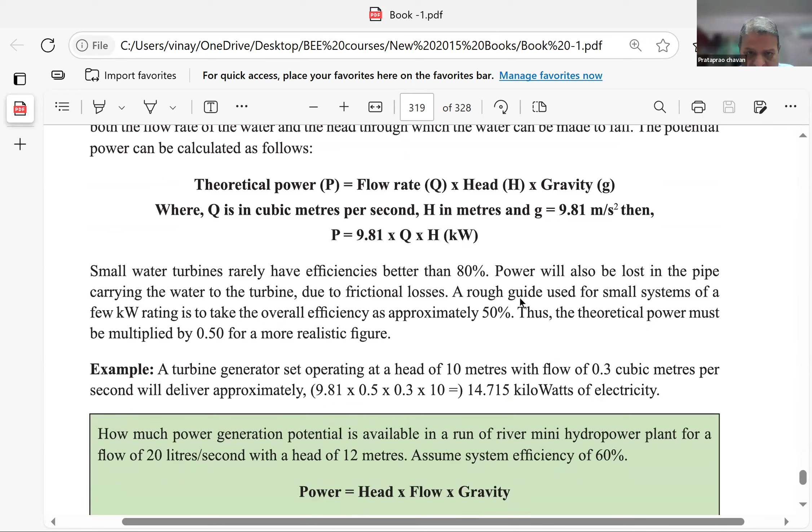What is the other method? As we have seen, stop the river, build a big dam, create a reservoir, and then use the same methodology. Here, he has given how to calculate how much power can be generated.

Power is generated because there is a gravity difference, or height difference, between two positions: the water and the turbine. It depends on how much weight of water is released through how much height. That is the gravity force multiplied by the number of cubic meters of flow and the height between them, whether it is 10, 20, or 30 meters. A multiplication of that will give you the power.

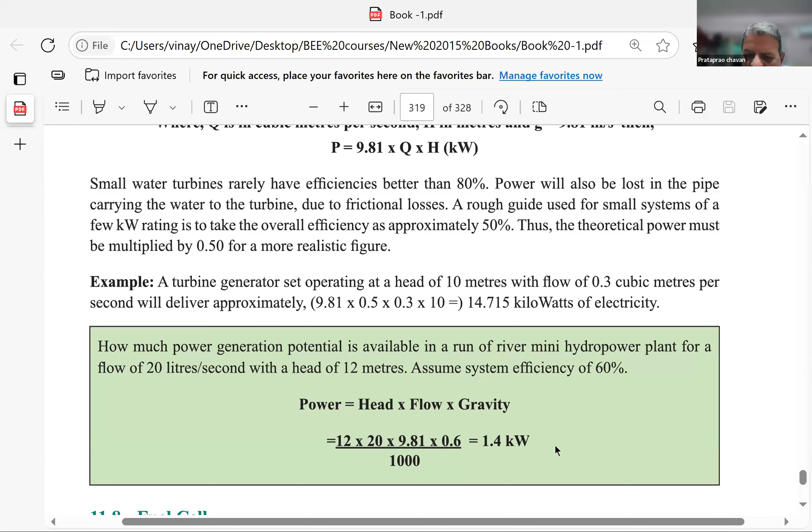See how much power generation potential is available in a run-of-river mini hydro plant for a flow of 20 liters per second with a head of 12 meters. Assume power system efficiency as 60%. Here he has multiplied by 0.6. Efficiency is 60%, so with this example we know what is this 9.81?

It's the gravity, gravitational force, 9.81. Efficiency is 60%, 20 liters is the flow mass which is flowing, and 12 meters is the height. That multiplication will give you 1.4 kW.

Got it? Now another resource, that is the fuel cell, which uses hydrogen gas as a fuel. The concept of fuel cell, look here.

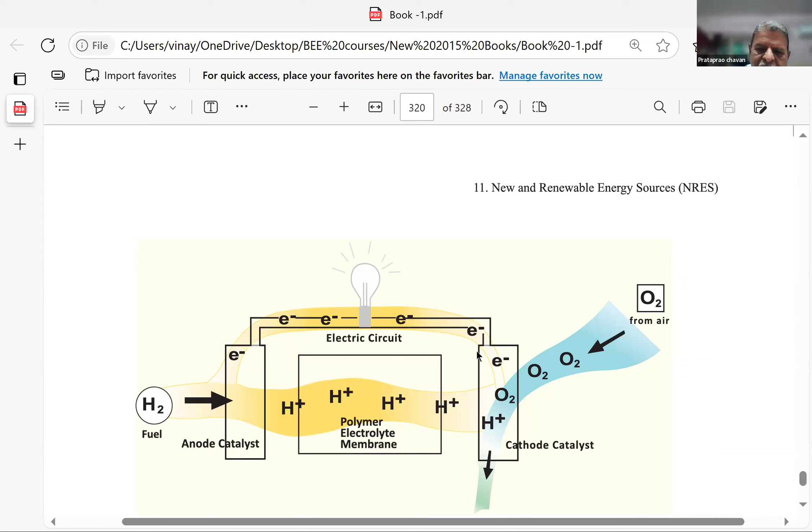Depending on the quality of hydrogen and the flow of hydrogen mixed with oxygen, it gives a power circuit, a small compact power circuit. It's called a fuel cell or hydrogen cell. The potential difference between the anode and cathode gives you the voltage available. If you put a number of cells, you will get higher voltages and higher current values.

The description you can go through. How does the operation of a fuel cell take place? It consists of two catalyst-coated electrodes surrounding an electrolyte, one is the anode, the other is the cathode.

The process begins when hydrogen molecules enter the anode. The catalyst coating separates hydrogen's negatively charged electrons from the positively charged ones, and they create two circuits. If you read, you will understand, nothing complicated about it. So how many types of such fuel cells can be made?

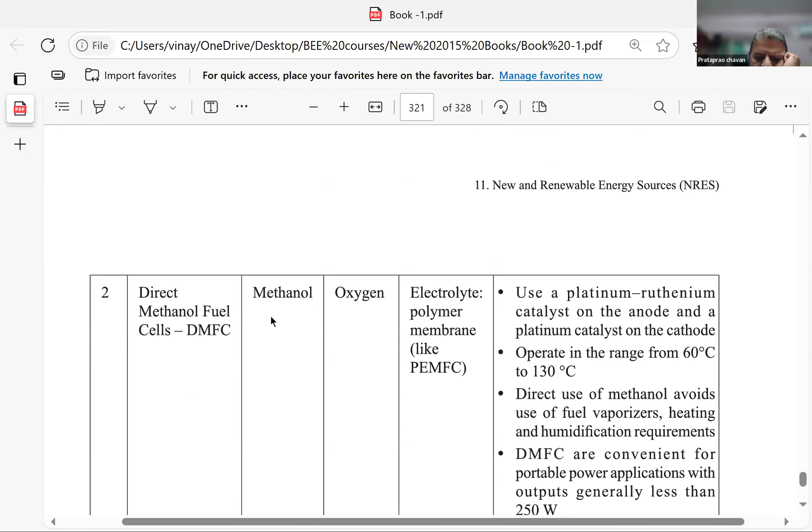The types of fuel cells: proton exchange membrane fuel cell. Don't go much into the complicated names, only understand there are anode hydrogen, cathode oxygen types. This is one type. Anode methanol, cathode oxygen, is another type. Or hydrogen and oxygen again at the anode and cathode, this is a third type.

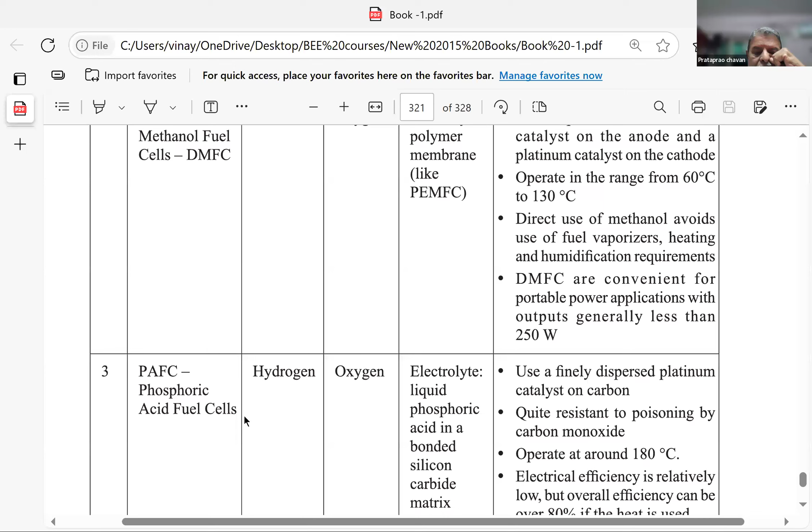The advantages and disadvantages, I don't think they will ask you in the exam, but reading is always better so you have some rudimentary idea of what it is limited to. The fifth type is synthesis gas, that is hydrogen and carbon monoxide with the cathode being oxygen, and then synthesis gas and oxygen carbon dioxide is another.

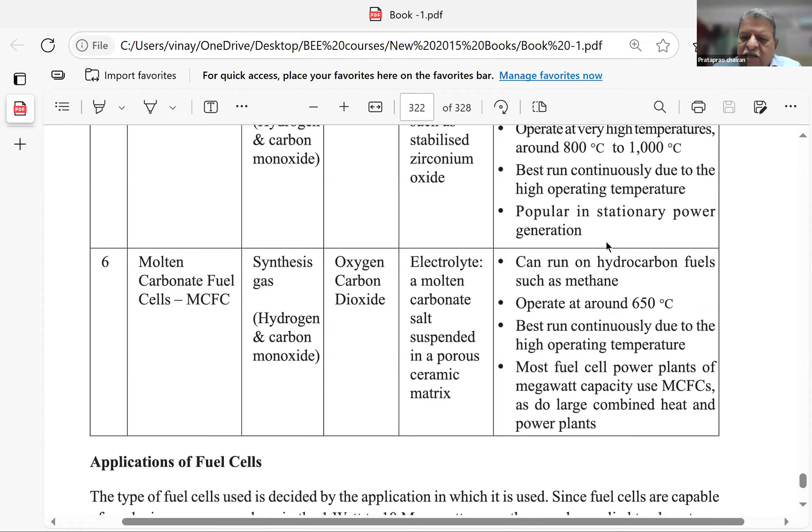So these are some technological details giving you a number of ways a hydrogen cell can be used for supplying power. What are the applications of fuel cells, where can it be used?

The type of fuel cells used is decided by the application. Since fuel cells can produce power anywhere from 1 watt to 10 megawatts, they can be applied to almost any application requiring power. That is why they are thinking of running trucks and heavy vehicles using hydrogen fuel cells, thereby creating a very clean ambience.

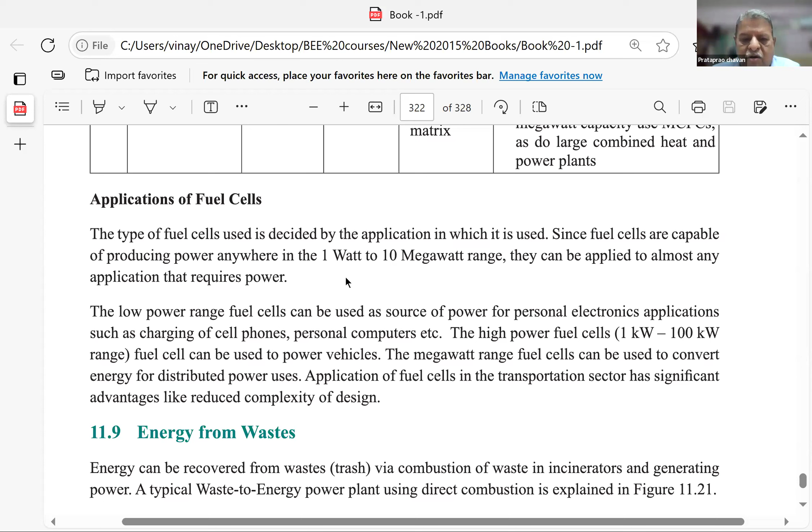When hydrogen burns, it oxidizes and forms H2O, that is water vapor. In the exhaust pipe, only water vapor comes out, no carbon, because there is no hydrocarbon to burn. These are very useful inventions. Only thing, commercially they still need to be made viable. The technology and pilot projects are undergoing R&D.

High power fuel cells in the 1 kW to 100 kW range can be used to power vehicles. The megawatt range fuel cells can be used to convert energy for distributed power uses and other applications.

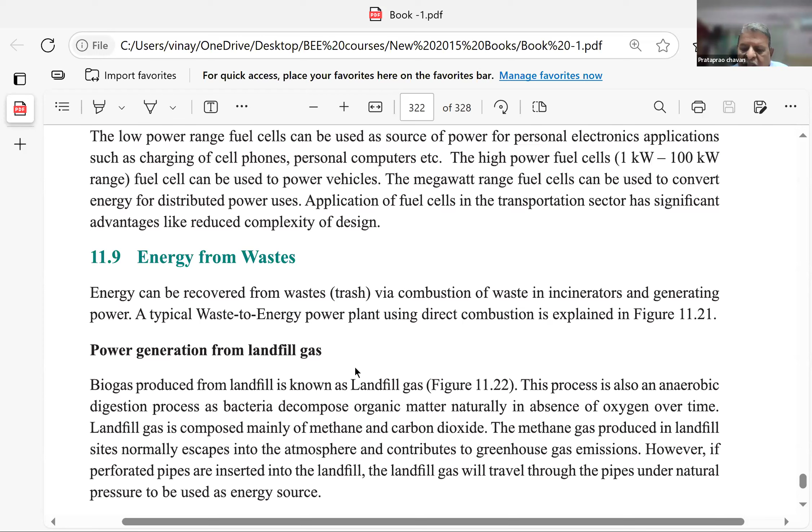Energy from waste is another source. Municipal waste, or whatever throwaway debris household people throw on the street, is waste. This energy can be generated by two methods: one is composting, another is burning.

Power generation from landfill gas: all municipal waste, wet and dry, goes to a dumping site. For metropolitan cities there are very large dumping sites, where daily hundreds of tons of waste is dumped, creating mountains and mountains of waste in that area.

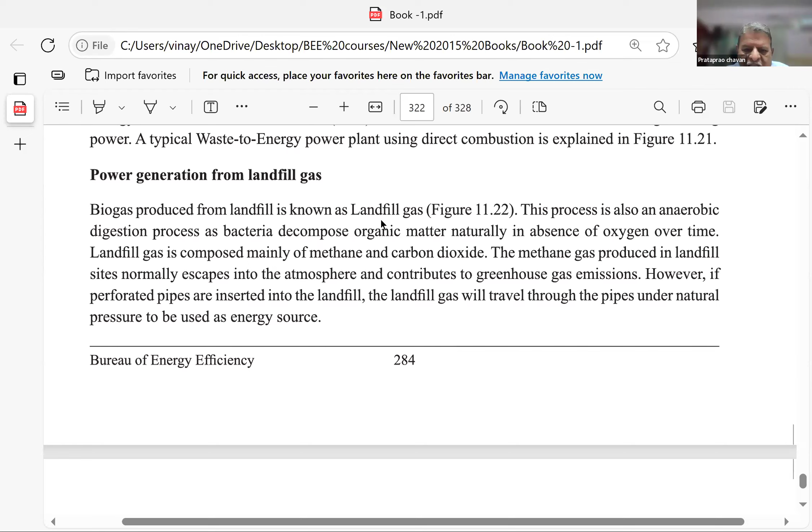Another method: in the dumping ground, perforated pipes with a number of holes are embedded inside. Whatever gas is released because of heat and waste degradation enters these pipes, since it is lighter than the solid waste. It travels through and gets collected into a tank. From this tank, it is screened and cleaned, then used in a gas turbine, which rotates the generator shaft, and this generator supplies power to the grid. This is power generation from landfill gas.

Power generation from any heat value material can be generated. We collect heat from any source, whether solar, wood burning, waste burning, or biomass burning—anything. We are in need of heat, and that heat is provided by landfill gas. This is generation from waste.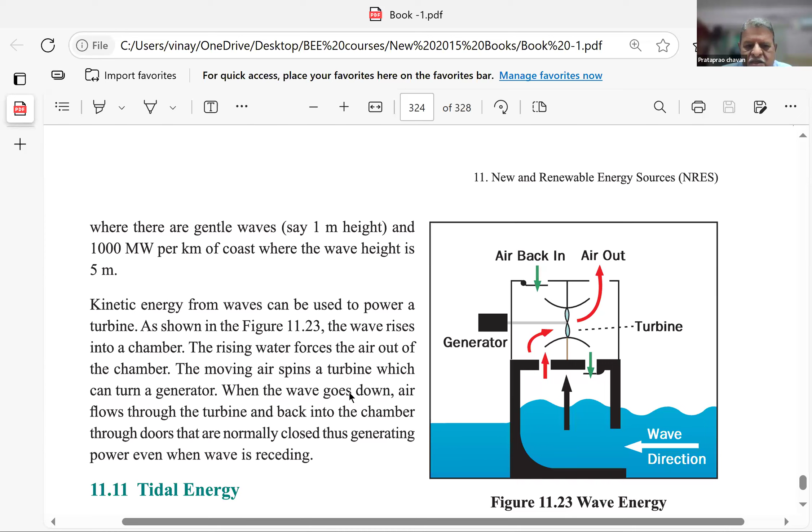Particularly during typhoons and high tides, the waves coming to the seashore have tremendous thrust in them. Can we extract that thrust to rotate turbines and generate power? That was the conceptual idea. To practice this tidal or wave energy, they create a structure like this.

This is a pakka concrete chamber with an opening into the seawater below the surface. The force of a tidal wave comes inside, and since it cannot go outside, it thrusts and tries to rise up because it is forcing. The thrust comes from the seaside, and when it forces, this aperture closes. Only one opening is open, through which it rises due to this force. When water goes up in this chamber, the air goes out since it's an enclosed volume.

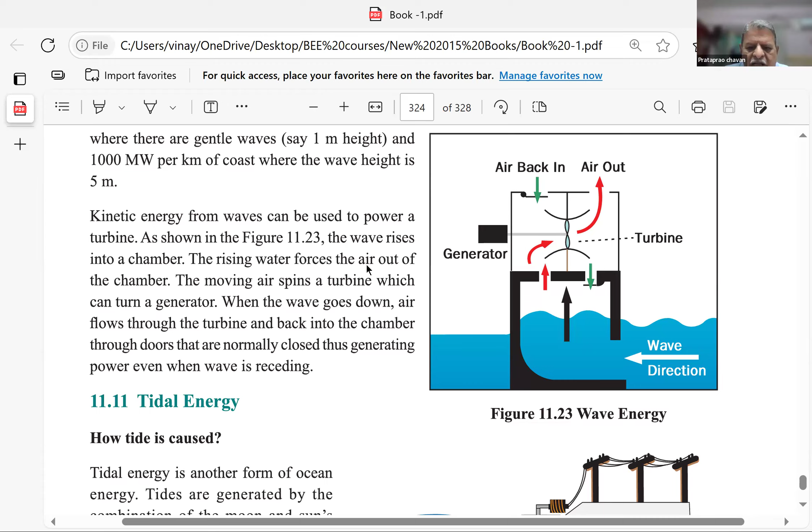When the tide goes back, it's a continuous movement of seawater, coming and going. The incoming wave passes through this hole, rotates the turbine, and air passes through and goes out. When the tide goes back, it creates a vacuum, the air comes in while the water goes back. When air comes in with force into the vacuum, it rotates the turbine in the reverse direction. So water rotates it from this side, air rotates it from this side. This cycle of rotating the turbine one way, then the other way, continuously generates power. That's the basic idea, conceptually, and it's given the appropriate name of tidal energy.

Second way of using wave energy: this is a shore and this is the main sea body. The wave coming from the sea goes through this turbine. No pipe, nothing, you just create a very solid foundation and allow the sea to enter through this tunnel. While moving, it impacts the blades of the turbine, rotates it, and generates power. When it goes this side, after some time it goes back to the sea because that's the natural movement of tidal waves. So while coming in, it generates power, and while going back, it generates power again. Tide going out, tide coming in, so continuously these turbines will be rotating and generating power.

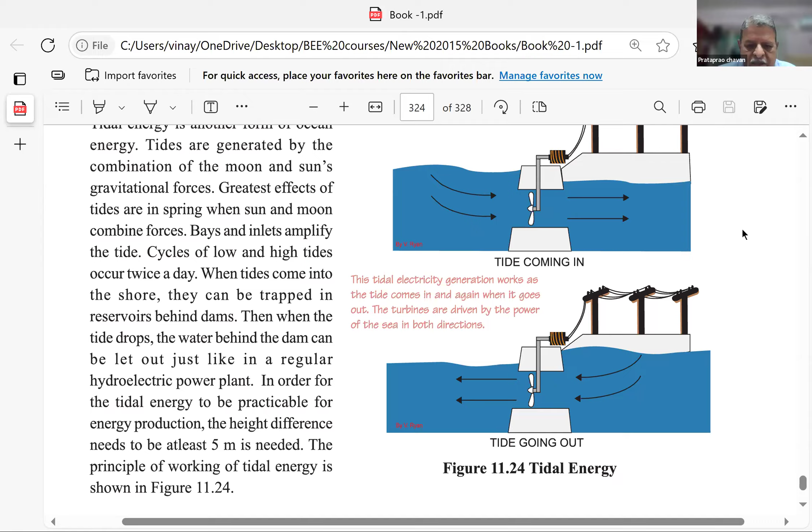The beauty here is once you install it, it is for life. There is no extra expenditure on this, only whatever maintenance expenses there will be, but no input costs, only the capital cost for installation. So it is the cheapest way of doing it, and this is perpetual motion. All the time, in all months, in all seasons, there is no stoppage of wave movement in the sea. India has such a large seashore all around that if we put enough strong installations, tidal power will be such a simple, less costly, and most economical method of generating power. It doesn't involve any CO2 burning, no heat, no CO2 going to the atmosphere. Conceptually, you should know this.

Next resource is geothermal. When you go below the earth's surface, if you dig deep enough, you will find the temperature of the strata increases by some degrees, and the deeper you go, the more the temperature. The core of the earth is in layers. The innermost core is called magma. Remember the word magma. This magma is in liquid form, at very, very high temperature. If a volcano breaks through the surface and this magma comes out, we call it lava, L-A-V-A. But the basic core is called magma. Remember the distinction between that.

Can we use the heat in the magma for our purpose? Since we want heat from any source, what we'll do is dig a well as deep into the strata as possible, put a high pressure pipe through this well, spread water in this area, and put another well which will collect the steam. The water gets instantly converted into steam because of this heat, and the steam is channeled and comes out of this well. So two wells are necessary: one injecting well, and a second steam collecting well. This steam, full of dirt, debris, and stone particles, can be filtered, and the clean steam can be used for rotating a turbine. The water condensed out can be re-injected, and a closed circuit can be used for generating power.

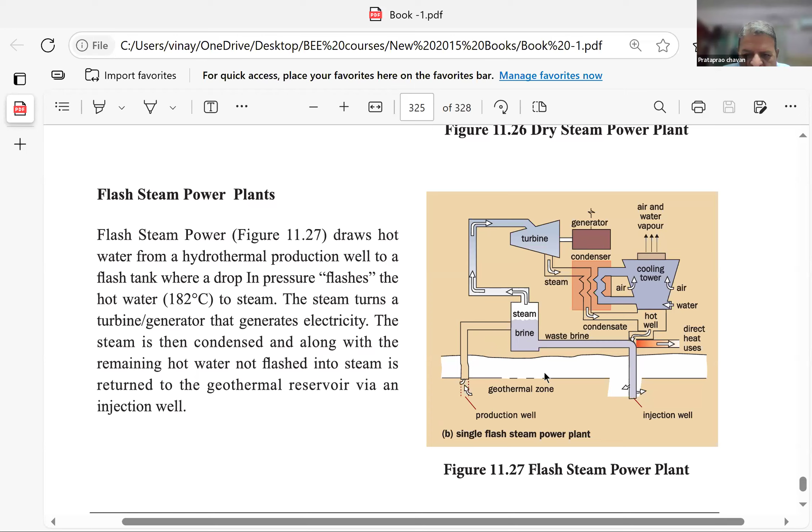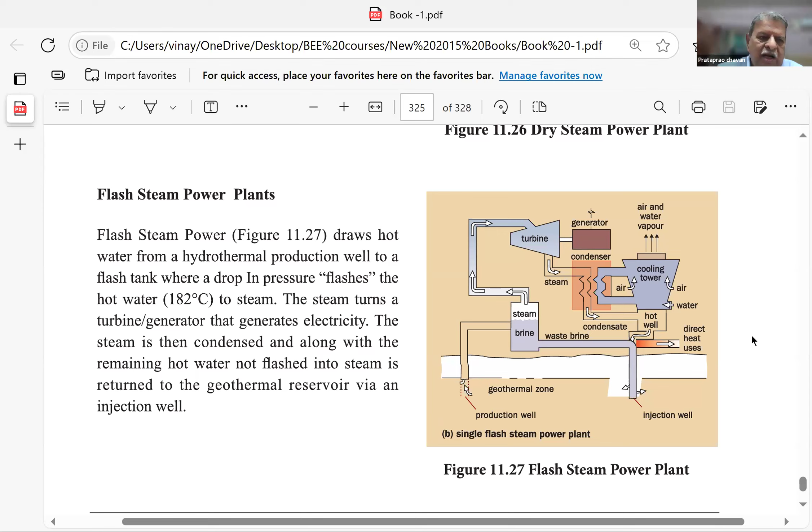That steam is used for power generation into the turbine. Now, there is some modification when they use a double circuit.

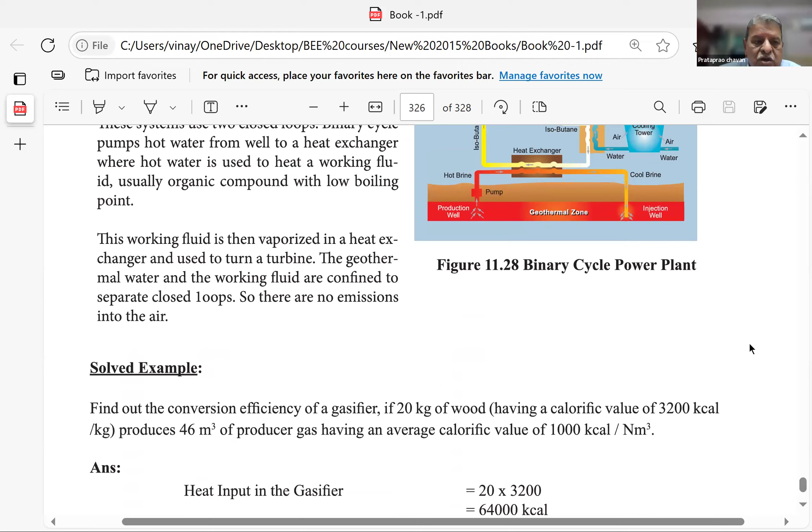Now here, find out the conversion efficiency of a gasifier for 20 kg of wood. These are different solved examples based on the source or resource of renewable energy which you can gainfully use, basically, as an energy auditor. Just a minute, let me close the window, it's making a lot of noise.

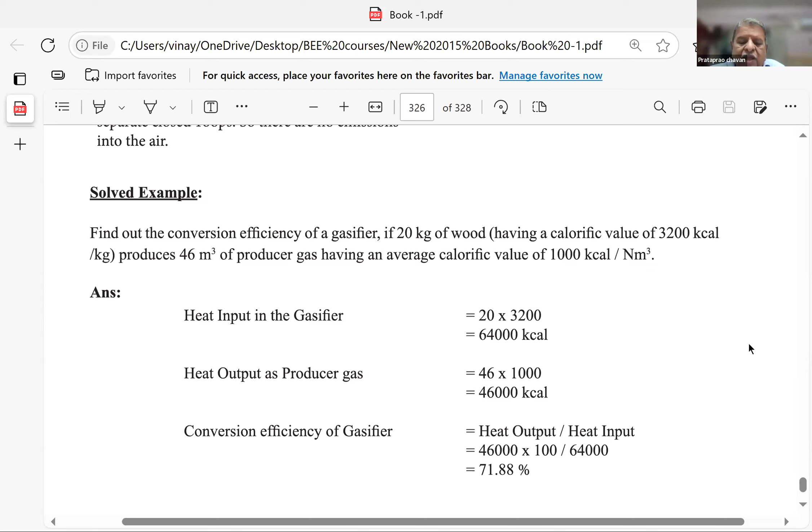They may ask you a comparative question: which renewable source can have a better conversion efficiency from heat to electricity or thrust to electricity. That kind of question, and they may give you a small example based on any one of the renewable sources. Here you can go through these examples.

This is only one, and then we come to the end. But my main point is that you already know the basic equations and the methodology, you can do the calculations. Read and try to remember the technical terms. But particularly for this chapter, it's not very important, so don't spend a lot of energy on it. Just remember the basic things which I have explained.

Mostly it will be MCQs. Try the MCQs, and my thumb rule is, if you are not sure which alternative is correct, don't leave it blank. Mark the nearest approximation you remember. It may be possible that it's correct, so mark it. Worst case, it goes wrong, but if you keep it blank, it's still wrong. So there's a 50% or 40% chance it can be correct.

Second simple rule: out of 50 MCQs you try on this, if you can score 40, even if 10 go wrong, what remains is only 35 marks you have to obtain from the remaining 100 mark question paper. Out of 150, you only have to get 75. So give thrust on MCQs.

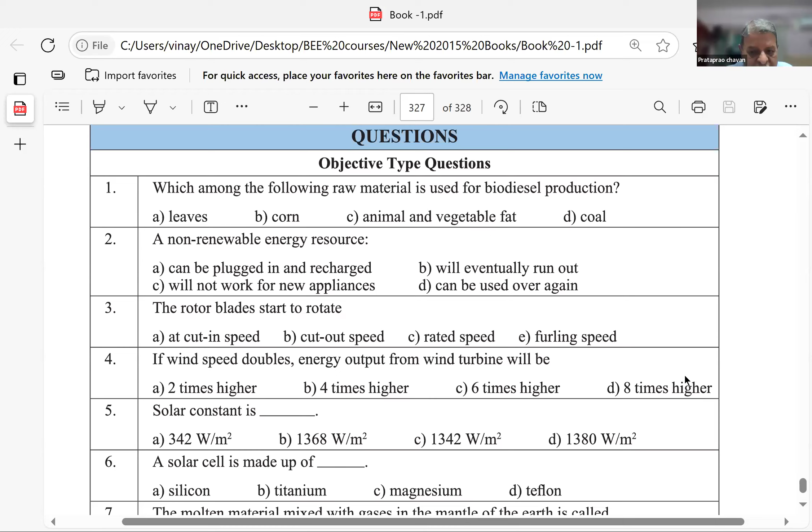If wind speed doubles, the energy output of wind energy will be 8 times. We have seen V cubed: 2 into 2 into 2 equals 8, the cube of 2 is 8. So the power will increase 8 times if the wind velocity doubles.

What is solar constant? First remember what constant means. It is the solar incidence falling on the top of the atmosphere of the earth, not on the ground. We have seen this, right? It is 1368. If you go back to the page in the book, you can find it.

A solar cell is made up of silicon. The correct answer is silicon. The molten material mixed with gases in the mantle of the earth is called what?

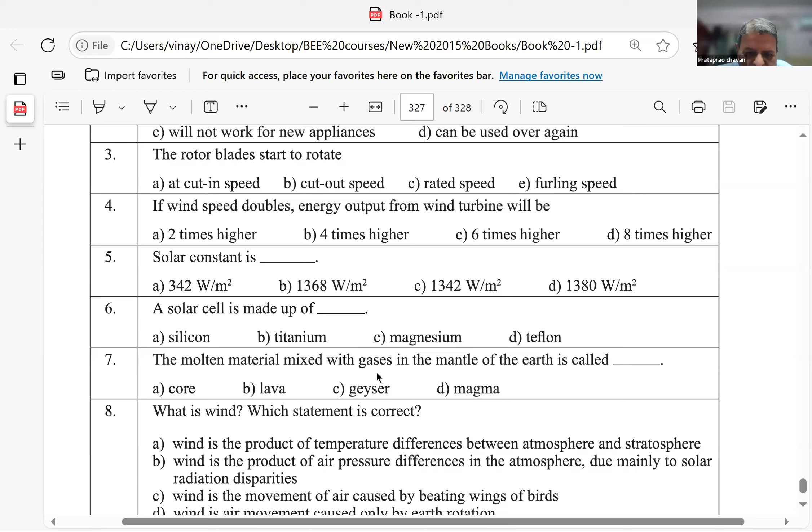Just now I talked to you about this. Inside it is magma. If it comes out of a volcano and spreads on the surface of the earth, we call it lava. But when they ask about molten material mixed with gases in the mantle of the earth, that is magma.

What is wind? Which statement is correct? Wind is the product of temperature differences between the atmosphere and stratosphere.

Yes, wind is the product of air pressure differences between atmosphere and solar radiation disparities. No, wind is not the movement of air caused by beating wings of birds. No, wind is not air movement caused only by earth rotation. B is the correct option.

Typical efficiency of solar cell is 10 to 15%. We have seen that. It is never 25 or 50 or 75, not that high. It is always 10 to 15.

Producer gas is only CO and H2, carbon monoxide and hydrogen.

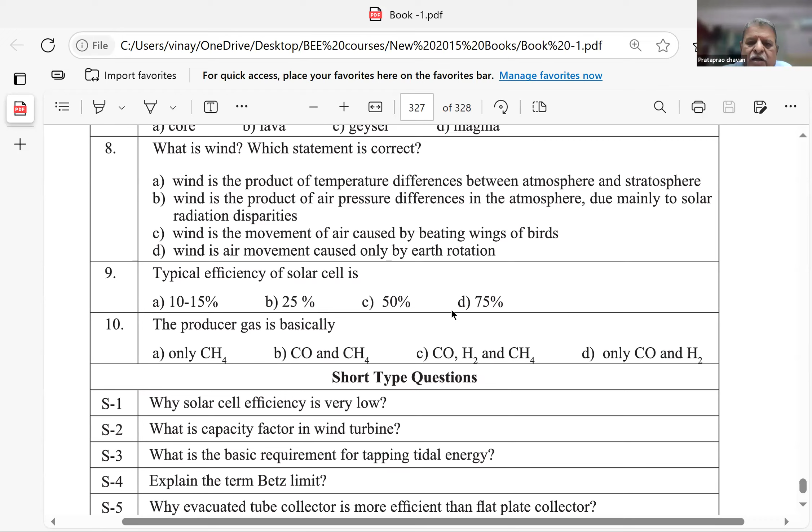So these are MCQs, 1 mark each. This type may come. You can go through the past question papers of the last examinations, you will find 2 or 3 such MCQs based on renewable sources.

Then short type questions, normally they are not asked, but if at all they are asked for 5 marks, why is solar cell efficiency very low? I have explained that different wavelengths of sunlight are there, and the solar cell silicon material can convert only specific wavelengths. So it cannot convert the entire heat value or light value of the sun's light into electricity. Therefore, it is very low.

What is the capacity factor in a wind turbine? We have seen it is hardly 19% or 18%.

What is the basic requirement of tapping tidal energy? We should have a civil structure suitable for using the force and using it through the turbines. That is the basic requirement.

What is the Betz limit? Go to the particular page in the book and find out.

Why is an evacuated tube collector more efficient than a flat plate collector? Because through evacuation, through vacuum, there is no heat loss. The inner tube which receives sunlight through a coated tube keeps the heat inside, there is no going back of that heat. Whereas in a flat plate collector, heat is received and partly it goes back to the atmosphere.

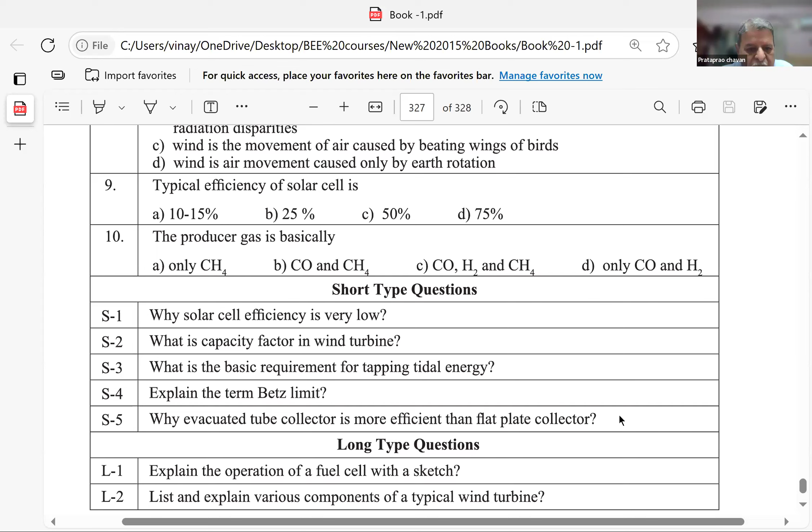And for long type questions, if at all they ask, they will say explain the operation of a fuel cell with a sketch, or list and explain various components of a typical wind turbine. We have explained the blade, the yaw motor, the low speed shaft, high speed shaft, the generator, then the wind direction vanes. These you explain briefly, and if you can draw a diagram, nothing like it, you will get the marks.

So with this, we come to the end of our chapter. We still have 10 minutes, so if you have got any questions on any subject, you can ask me. It's open for discussion.

Are you still there or have you already left? Hello? Sir, we are here. Yeah, you are there. So you can ask me the questions, or if there are no questions, let us say goodbye.

Sir, a question about bifacial solar panels - is the efficiency more than normal photovoltaic panels? No, bifacials do not have more efficiency. What happens is the area exposure is double, isn't it? Yes, one face and the other face. So in the same frame of a panel, you have double the area which will absorb sunlight. But since bifacials are not at right angles to the sun's light - one face is at right angle, the other in shadow, or if you put them vertical on this side and that side, the sunlight falling on these vertical panels is at an angle. It will not fall with full intensity. Therefore, even though the surface is double, the production is not double, whereas the cost is almost double. Only the metallic structure may be slightly different, but not proportionately. So as you said, if we did bifacial, it will not increase the efficiency or collection double. Some percentage will be higher because the surface area is double.